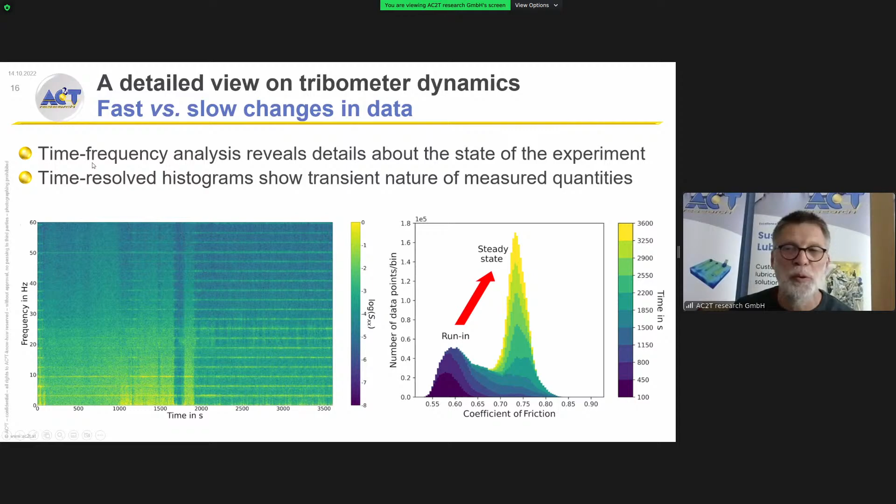Another important aspect is that you should actually evaluate the data on a cycle-based analysis. That means take one cycle after the other, look at what are the periodic features and what are the non-periodic features, and then you can reduce the error bars or the uncertainty of your data by a great amount. This will give you, for any later data analysis step, much more reliable and clean data.

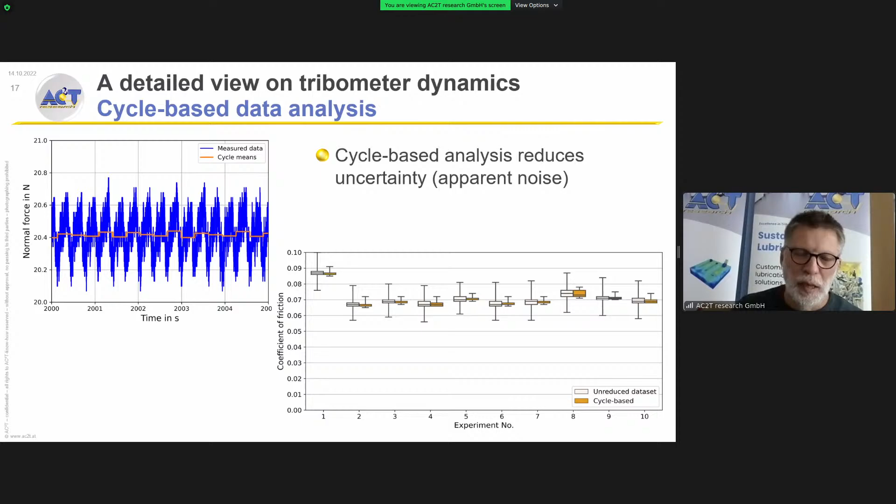Another very powerful tool which we developed in our company is what we call a 3D visualization of cycle data. Here, on one axis, you plot the in-cycle position. In our case, it's simply the rotation angle of the disk, but it may also be in a linear oscillating test rig.

This is, to my point of view, very useful in any kind of tribometrical experiment to get a clear idea of what's going on in the experiment, and then to pre-process your data for further analysis in a good way.

As promised, I give you the reference for this work. It was published in Friction in '21, and it's open access.

All right, so then let's continue with the next example. And this is now really about machine learning itself. Again, I would like to start with some motivating statement.

So what we have here is basically a laboratory setup in a linear oscillating tribometer, where we test a self-lubricating journal bearing, which I will show you later a picture of how that looks like, in an oscillating motion against the steel shaft. The idea is to mimic in this experiment the real-world behavior of this machine element.

Here are highlighted some of the operating conditions. What we have done is equip this machine with force sensors, with thermocouples, and with a microphone to get data for algorithms which would actually detect states of operation later on.

These experiments are carried out by setting a certain threshold on the maximum force which we can transmit, and when this force is reached, it is stopped. This is typically after 50,000 cycles, and we have 9 experiments.

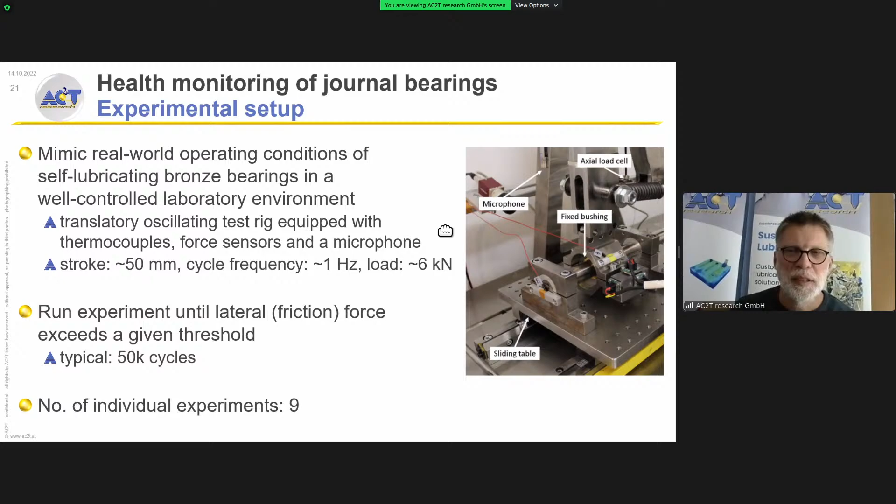Now the goal for machine learning is, what if we could train an algorithm which automatically detects these states and identifies critical operating regimes early enough so that we can take countermeasures, for example, to add some lubricant, or stop the experiment at an early stage.

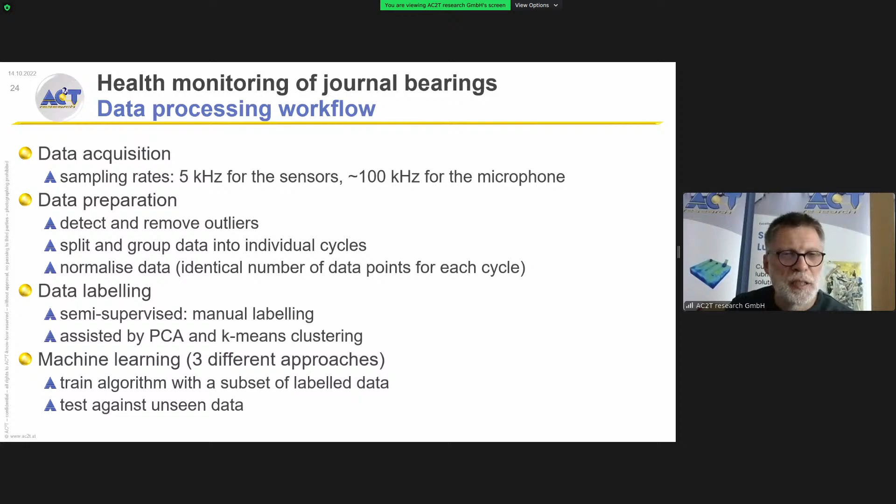These are the typical steps to go. I would not go into the details here, but just jump into the data labeling procedure. So, as I told you, we had 9 experiments, each consisting of about 50,000 cycles, and the goal was to label each individual cycle of each experiment. Of course, that is very tedious to do if you don't have any help for that.

Then we tried 3 different approaches to actually classify this data. The first approach—okay, I forgot to tell you, how did the manual labeling go?

We actually plotted the shape of the friction data over each other and checked where, at least from visual inspection, we can see differences, and then we would adjust the labels which were pre-given by the k-means clustering algorithm.

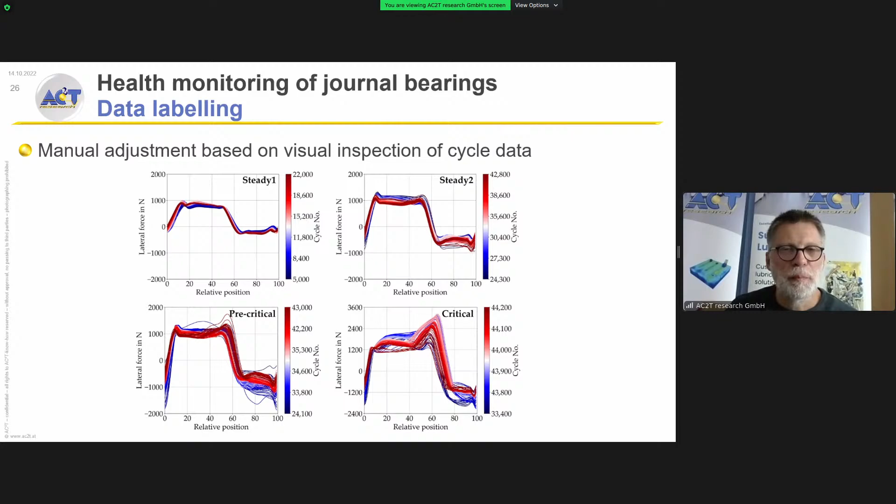So the first effort we made was using a random forest algorithm to train the data, to classify the experiments according to these 5 labels, or 5 classes, which we have given before. This is just a very short sketch of how we do that.

I think for all of you who did some machine learning, the procedure is probably the same everywhere. You take a data set from 4 experiments, split it into a training set and a test set, and train a random forest classifier. You make a cross validation against the test set and get a trained model from that.

The details are of course hidden more or less in the routines which we take. In this case, we take the scikit-learn library for Python to do that.

Then to check if the quality of the classification is satisfactory, we apply the trained algorithm to unseen data. That means from our 9 experiments, we've taken 4 to train the algorithm, and then we take another one to test the quality of the classification.

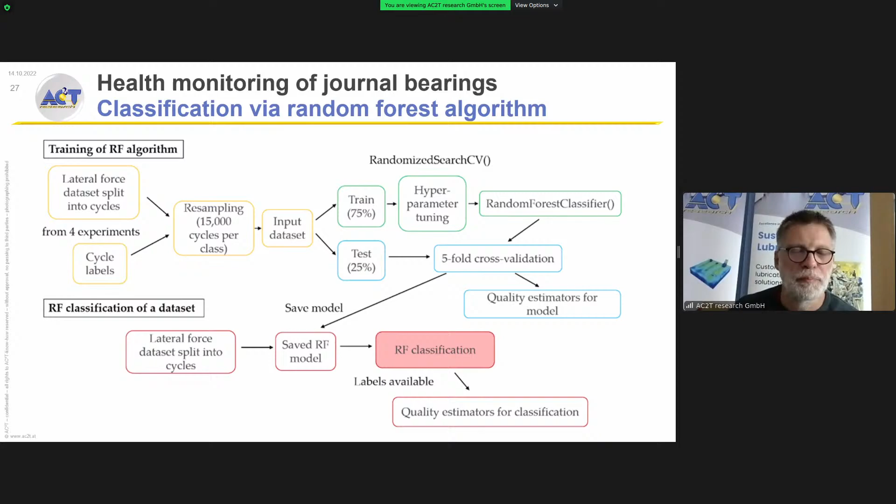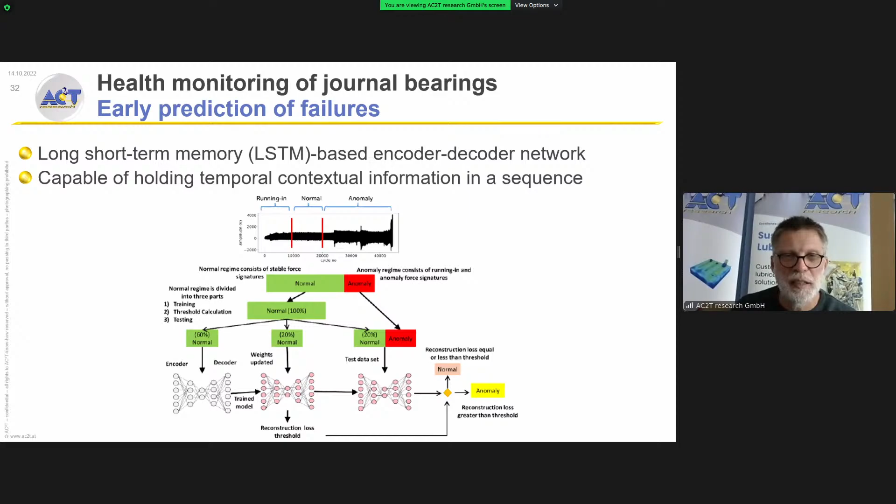Again we split the data into training and test data sets, basically the same procedure. What we could see is that about 5,000 cycles before the force signal would indicate abnormal behavior, this algorithm could already predict, by a largely increased reconstruction error, that something is going to happen. This, in my opinion, is the right tool if we would like to start investigating our system before it is damaged too much.

So again, we have 3 papers on that topic corresponding to these 3 steps I just told you. The first is about the random forest classifier. The second is about the microphone and the variational autoencoder. The third is about the long short-term memory encoder decoder. These are all open access, so you can access them if you want.

Now, since I'm running out of time, I go to the third example, which deals with engine oils. The methods here are more on the classical statistical side.

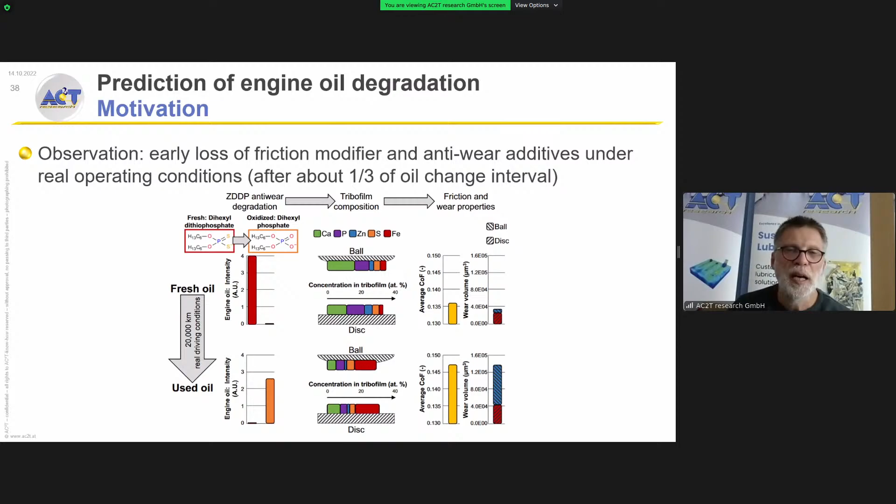You see that in the chemical composition, which we use to identify the state of the oil—I will come to that in a moment. But you also see it when you take this oil and do laboratory friction and wear tests: the coefficient of friction and also the wear rate increase when the oil is almost at the end of its life. Here are some example data from our friction and wear tests in-house, showing that the coefficient of friction rises and also the wear volume or wear rate rises.

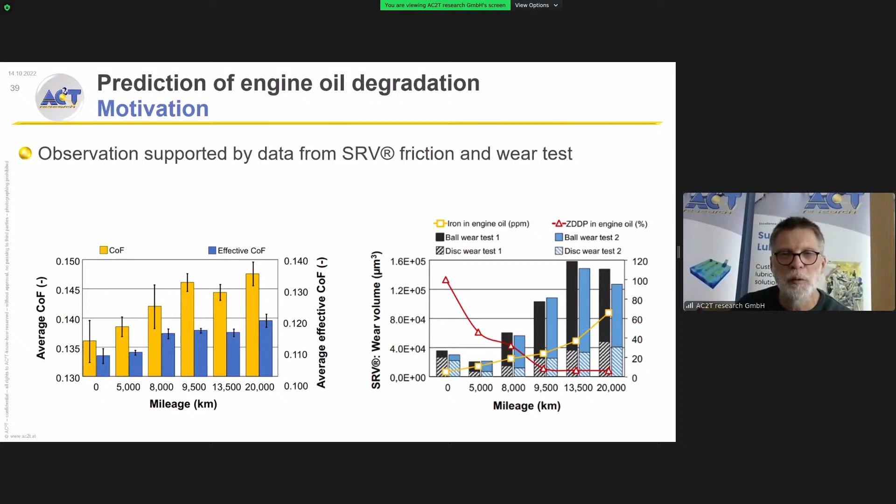This is the observation on a qualitative level, and the motivation is to devise some statistics or procedure where you can model this data and give more quantitative correlations between the different aging states of the oil.

One specialty we have in-house is that we have put up laboratory equipment where we could simulate this oil degradation under well-controlled laboratory conditions, what we call artificial alteration. And the question is always, are these artificial aged oils comparable to the natural degraded ones, meaning those actually destroyed in the car engine.

So we have a cooperation with Professor Filzmoser at the TU Wien, who is a well-known statistics expert, and with one of our joint PhD students we are dealing with this topic here.

We have oil samples from a passenger car, which were collected in an operating range of about 20,000 kilometers.

And then we have two different artificial aging setups. One is called small scale, which is just a laboratory device of this size, where you can probably age 1 liter of oil. And then we have a large scale reactor, which can operate a barrel of oil.

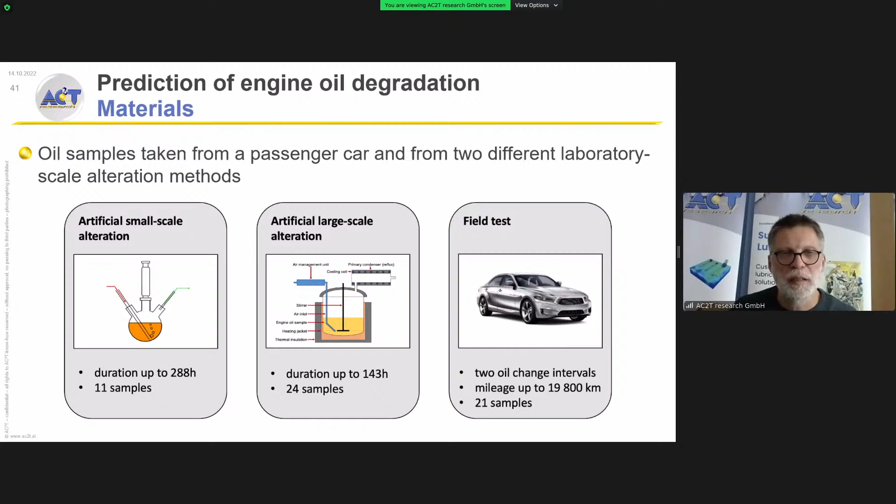The chemical information is obtained in this case using Fourier transform infrared spectroscopy, which measures absorption bands. This is a very well-known procedure for lubricant chemistry, and the experts in the chemistry department can actually assign certain products of the lubricant to certain bands in this spectrum.

And this information should be used to devise some quantitative correlation techniques.

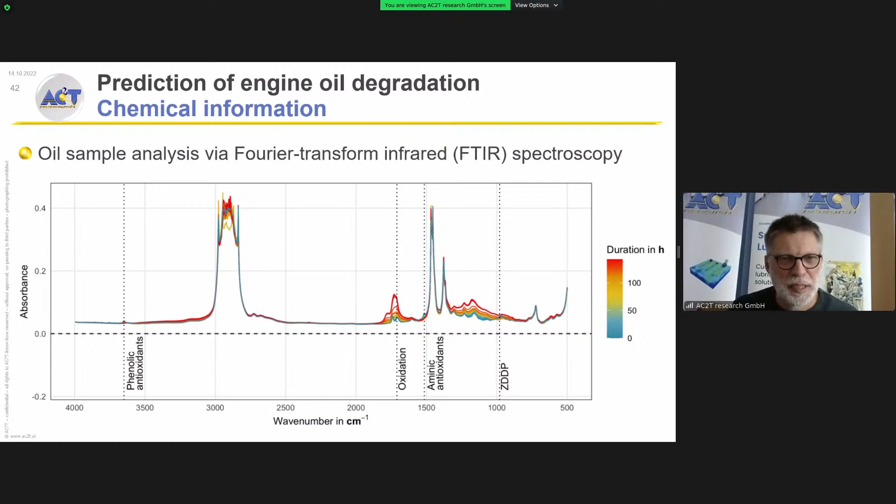So the first effort was to use more the exploratory aspect of statistics, namely the principal component analysis, to check where the biggest variation in the spectra might be.

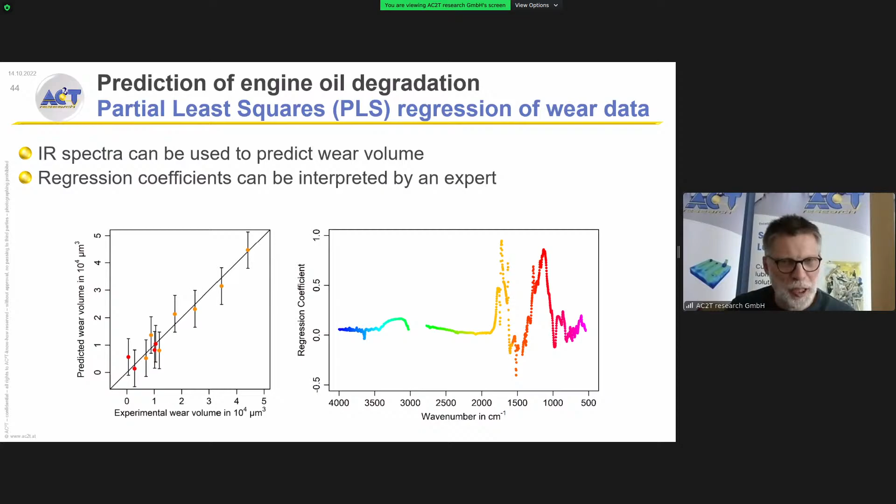What we also did is employ a partial least squares regression method to correlate our chemistry information with the wear and friction information which we got from the tribometers. Again, the interpretation is up to the expert what that means, but the correlation is not so bad, I would say.

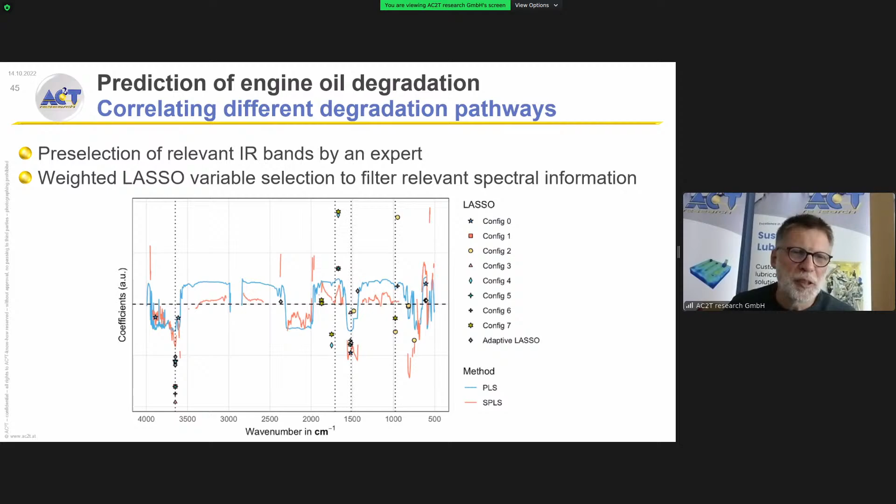And finally, we employed more modern statistics methods like lasso regression to actually correlate the mileage in the field to some duration in our reactor in the laboratory.

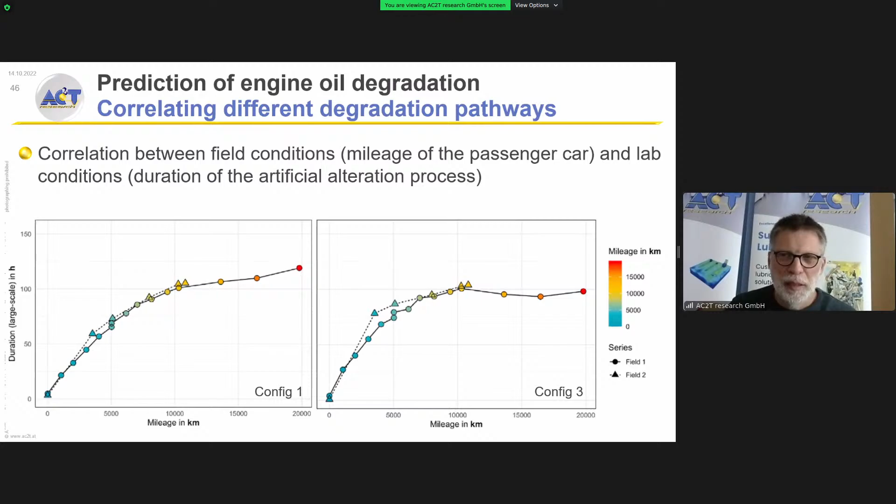Okay, so I will finally come to a summary and some conclusions. I would like to say that we have a few application examples here which demonstrate the various aspects of data science in our research, and AI and ML is only one of them.

All examples are real data, from experiments, and we always have domain expert knowledge as an important input in our examples. The findings which we publish or report here are limited to the specific system at hand, and we make no claims about transferability to other systems.

Finally, our data science activities are motivated by practical research questions, as you have seen, and we do not pursue data science as an end in itself. We are users of data science, but we have good partners who are really experts in the field, and they help us to keep up with or go beyond the state of the art in the methods we use.

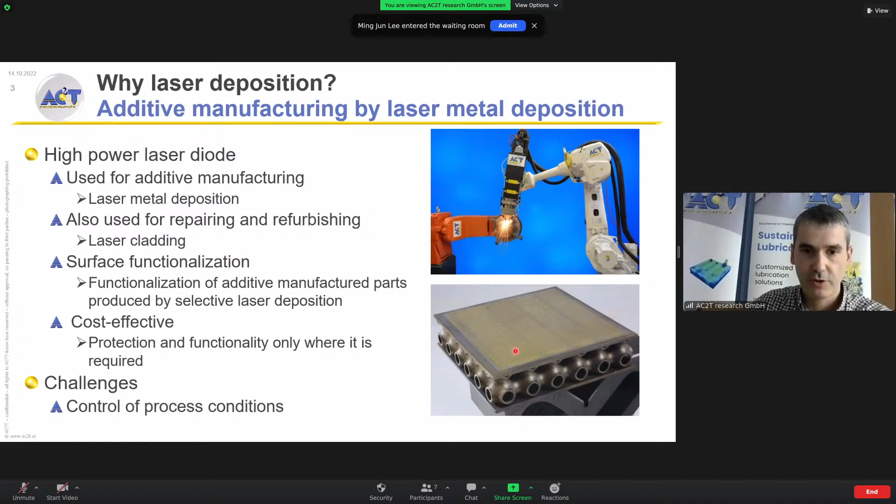But it also has some challenges in material deposition. The point is that, for example, if we have a nickel-based alloy and we want to make it self-lubricating, we need to add some solid lubricants. For example, silver is a soft metal with good shear, with low shear properties, but nickel and silver are not miscible. So if we melt them with a laser, we end up having a microstructure like this.

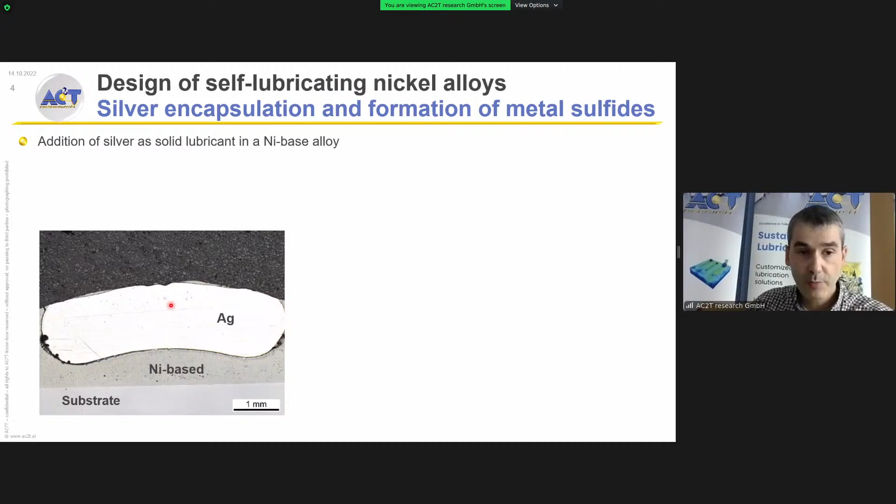So it's a substrate with a nickel-based coating with a huge silver bubble on top of it. This is completely useless, just a fancy way of wasting silver. If we want to have something useful, we need to have this solid lubricant homogeneously scattered and distributed in the microstructure. To do this, we need diffusion barriers for the silver.

We can do this using, for example, sulfide compounds. In our case, we use molybdenum disulfide that during the thermal deposition decomposes into chromium sulfide. This means the process is not limited to molybdenum disulfide; other sulfides can also be used as a precursor. Once we use these sulfur compounds, we end up having this microstructure with characteristic nickel dendrites, and silver, like these light gray silver inclusions that are surrounded by dark gray chromium sulfides.

So we check this nickel self-lubricating alloy under different conditions. The first one is reciprocating sliding model experiments against martensitic stainless steel. We always use some material as a reference; in this case we also use martensitic stainless steel cladding as a reference, shown as the red line. We can see here that when we use the martensitic stainless steel, friction is very high.

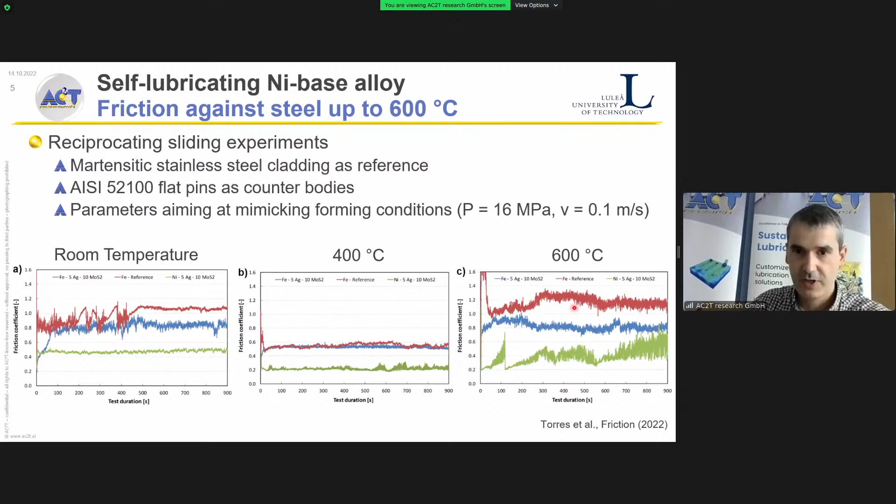And when we use, for example, the nickel-based alloy, the green lines, we are able to have a very steady and low friction. For example, look here at 400 degrees - we can have metal-to-metal contact at 400 degrees without any lubricant and a steady coefficient of friction of 0.2, compared to close to 0.6 for the martensitic stainless steel. So very good friction performance, and at 600 degrees it still manages good performance, much better than the reference alloy, though it already struggles a bit.

We also tried a close-to-reality tribometer available at Luleå University of Technology in Sweden. In this case, we have a strip test with aluminum silicon coated ultra high strength steel at 700 degrees, and we always do a single pass, replacing the sheet and using a new one each time.

You can see here the results: when we use the reference, in this case a nickel based material without any solid lubricant, friction is high, and we also have these break-ins into the aluminum silicon coating, with spikes of friction close to 1. When we use the self-lubricating one, shown in blue, we have much lower friction, around 0.3 for every sheet, and when we change the sheet we also don't have this break-in friction. We also get a change in the wear mechanism, switching from adhesive wear, which is very detrimental in forming processes, to mild abrasion.

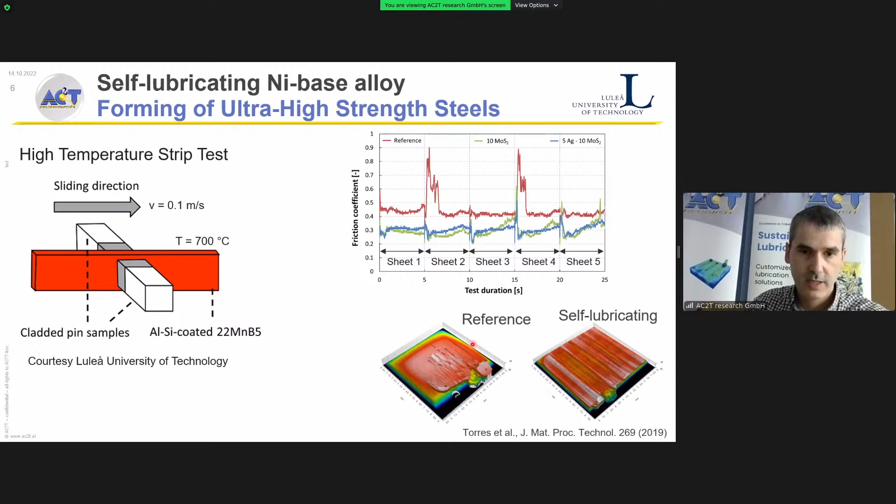Another example, also in this case, model experiments, reciprocating sliding against aluminum alloy. In this case, forming of aluminum is very demanding, so we added some solid lubricant and checked what happens when we have lubricant starvation.

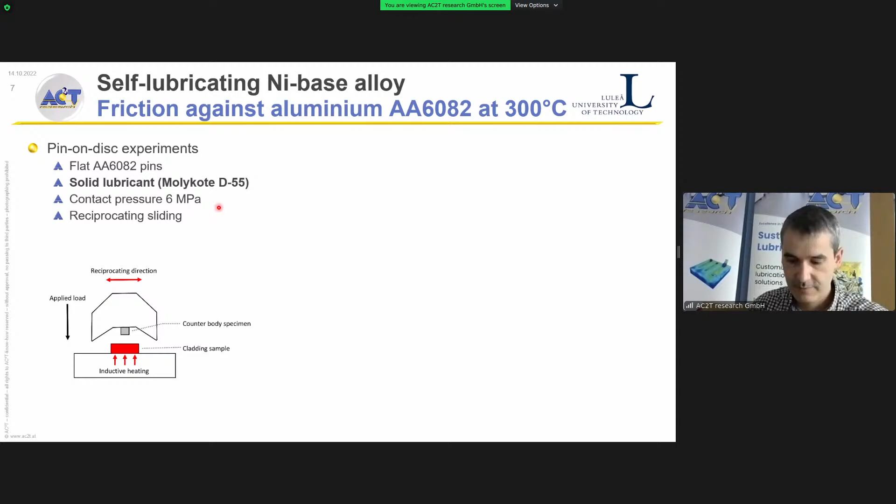You can see, for example, a tool steel starts here with very low friction, but as soon as the solid lubricant fails, friction skyrockets and goes over 2, and we need to stop the experiment due to extremely high friction.

With the nickel base, the blue line, we see that initially friction is low due to the solid lubricant, then you end up building a tribofilm, and at some point friction gets very stable with a value of 0.5 and could continue during a much longer period. Also in this case, we see that we switch from adhesive wear to mild abrasion.

But where these nickel-based materials really shine is in vacuum. So in vacuum, we tested against 440C martensitic stainless steel. This is the reference material for vacuum experiments. This is a pin on disc, but don't be confused, it's not unidirectional. It's reciprocating sliding, so we are moving around an arc of circumference with a constant normal load at 2 different temperatures, room temperature and 300 degrees, without any solid lubricant, without lubricant at all.

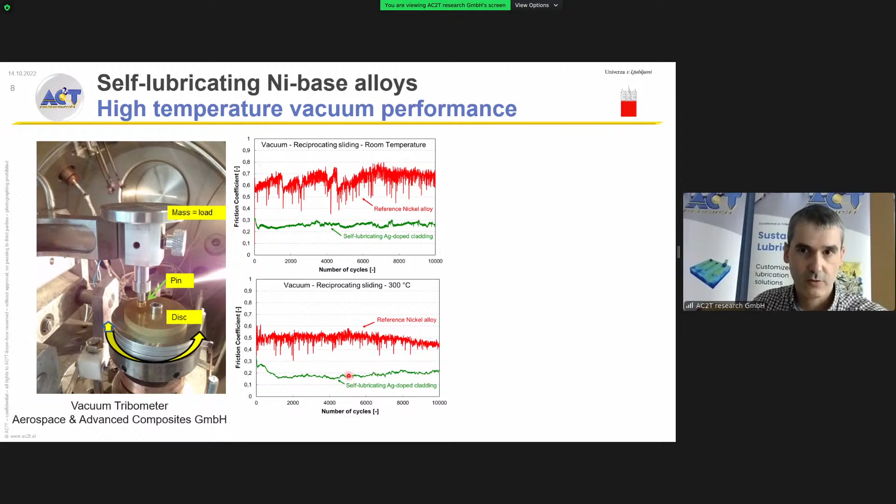So completely dry contact. What we can observe here is that the reference nickel alloy at room temperature or at 300 degrees has a really high coefficient of friction, very unsteady with these spikes characteristic of metal-to-metal adhesion. With the nickel-based self-lubricating material, friction is very low, around 0.25 at room temperature and slightly below 0.2 at 300 degrees. Again, this is metal-to-metal contact in vacuum at 300 degrees without any lubricant at all.

In this case, what we can observe is that not only is the friction much better, but also the wear is much better. For the reference nickel-based cladding, we have severe plastic deformation and an irregular wear track. With the self-lubricating nickel cladding, friction is very, very small, with a very homogeneous, narrow and thin wear scar. We can see in the scanning electron microscopy image how this smearing of silver, supported by thermal softening at 300 degrees, helps control friction at these temperatures.

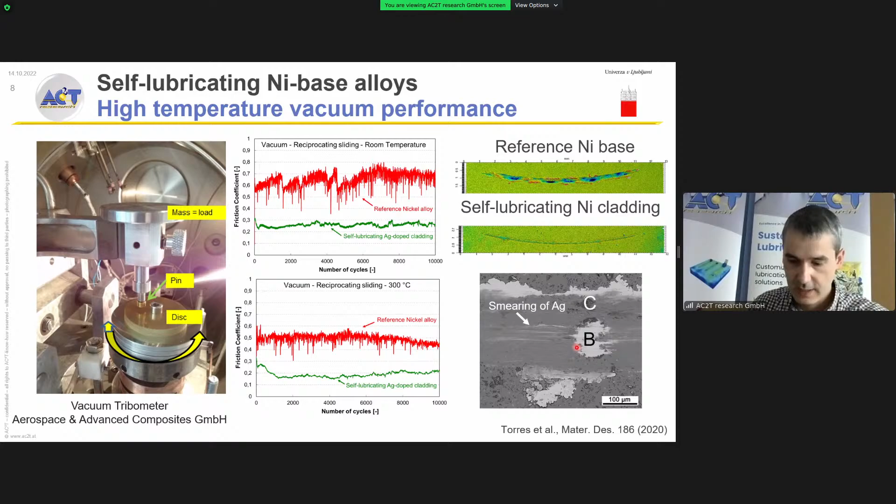Now I would like to leave the last 2 slides with a bit of outlook. So what are we doing right now? We thought, okay, having a nickel self-lubricating material is cool, but actually it would be much cooler to have a self-lubricating titanium alloy. Titanium is a superb material, with excellent strength to weight ratio and very good corrosion resistance, but really miserable tribological properties. The idea is, would it be possible to have a titanium alloy with some self-lubricating properties?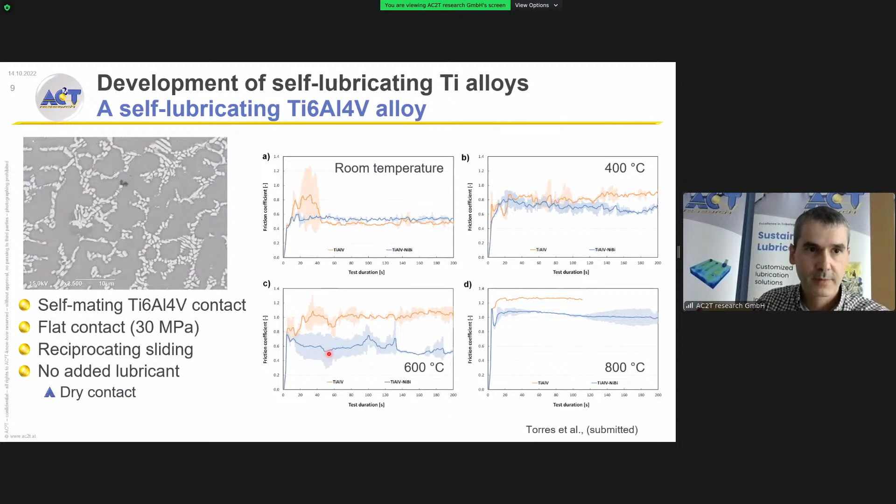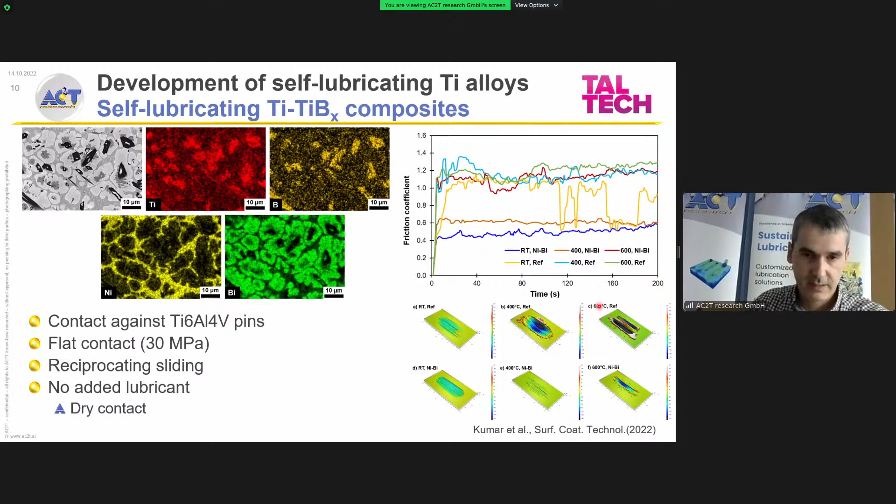Finally, we came to our colleagues from Tallinn. They are working on powder metallurgy, developing titanium boride composite materials, and we apply also this nickel-bismuth addition, ending up with this titanium boride titanium phase surrounded by bismuth, and this bismuth phase surrounded by nickel. We repeated these experiments under very detrimental conditions, self-mating titanium contact, and we see that especially at the lower temperatures, room temperature and 400 degrees, friction in a titanium self-mated contact can be as low and steady as 0.4. Not only does friction get better, but compared to the self-mating titanium contact, the wear becomes much better too.

So with this, I would like to conclude. I have shown you our initial self-lubricating nickel alloy that works by encapsulating metal sulfides on silver pockets, providing very good friction control in air until 600 degrees and 300 degrees in vacuum, friction reduction in different forming processes, and now our current work on self-lubricating titanium alloys.

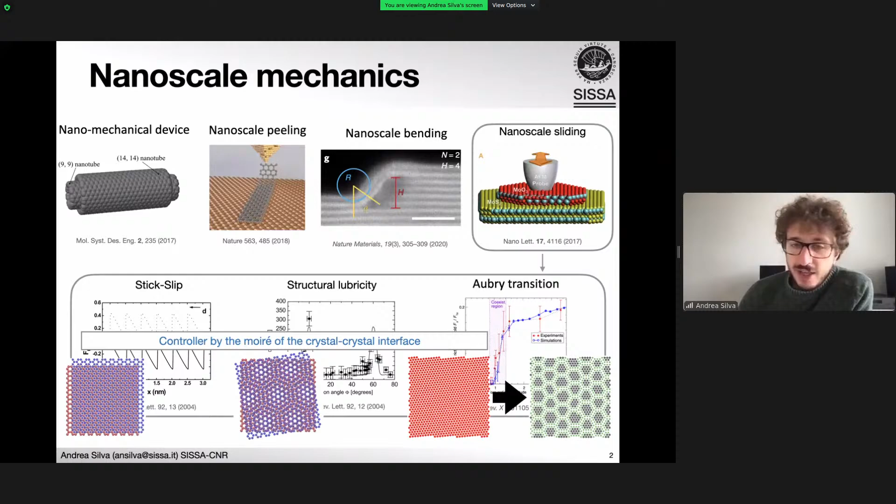The zoology and variety of these patterns for specific crystal interfaces is very big, as we saw in talks on Monday. It can be probed by high-throughput density functional studies, where you compute the potential energy surface of two crystalline interfaces sliding.

It has also been probed in experiments, for example gold island sliding, molybdenum disulfide island sliding on gold, where the system is always pushed in the same direction but moves along a preferential direction due to crystal symmetry. So there is directional locking of the motion.

At this small scale, the effect of finite size is also very important, as shown in 2013 by Dietzel. When studying friction as a function of size, friction scales according to specific rules, and in particular structural lubricity, where friction disappears in an infinite contact, displays sublinear scaling with the number of atoms.

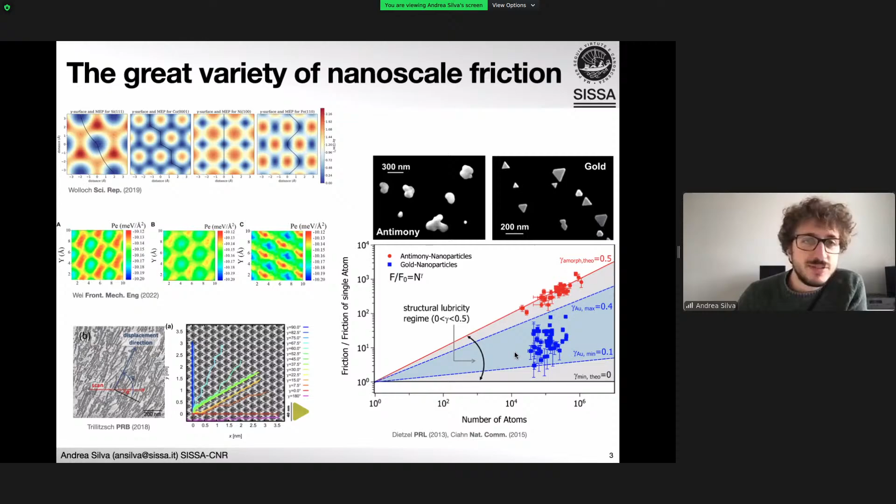So the realm of sliding friction at the nanoscale is complex, and even to explore it we need some guidance. That's what we tried to do recently: defining a degree of commensuration and trying to answer the question, given an arbitrary interface - meaning two mutually rotated lattices - what is the qualitative friction behavior to expect? Not going quantitative, like a step before high-throughput, but a general understanding of what friction to expect from a given contact.

So we work on a geometrical level to be general and fast. Now I will try to summarize a lot of math in a visual way. But first, let's build a system.

Our system is built from a substrate potential, which has a general form and is periodic with whatever periodicity we want. There is a reciprocal space associated to it - the Fourier transform of the real space.

We put above the substrate our adsorbate, building our crystalline interface. This is a second lattice with a different periodicity that can be rotated at an angle, associated with an adsorbate reciprocal lattice as well - the red point here.

The frictional quality of the contact at this nanoscale, at least in this theoretical extended world for now, is given by the appearance of a coincidence lattice vector, which is when the two lattices match so they can interlock nicely and give rise to high friction or structural lubricity.

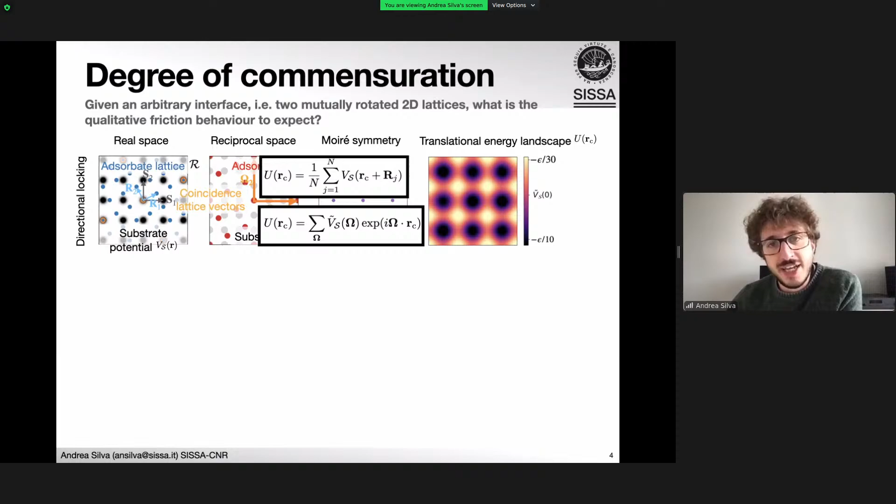So this is the case of directional locking, where friction is high and you expect stick slip. On the other hand, we would have structural lubricity, where the system can slide freely in any direction. So the energy landscape that we see here is flat.

This means that the two lattices are incommensurate, but there could still be, mathematically, a coincidence lattice vector in real space. But if there are none in the reciprocal one, then you would expect to see this sort of flat energy landscape.

In this categorization, we discover an intermediate novel type of interface, which we call directional superlubricity, because for specific lattice symmetries, you would have only one coincidence lattice vector, and the moiré pattern would form dense lines spaced over discrete spacing, which results in an energy landscape made of valleys and ridges, where the friction is exactly zero along the valley, but retains a finite value perpendicular to it.

Going back to the real world, the first case would be graphene sliding on graphene, where as you translate the upper layer, you go through different configurations with minima and maxima alternating. Another example with the same symmetry would be nickel on nickel.

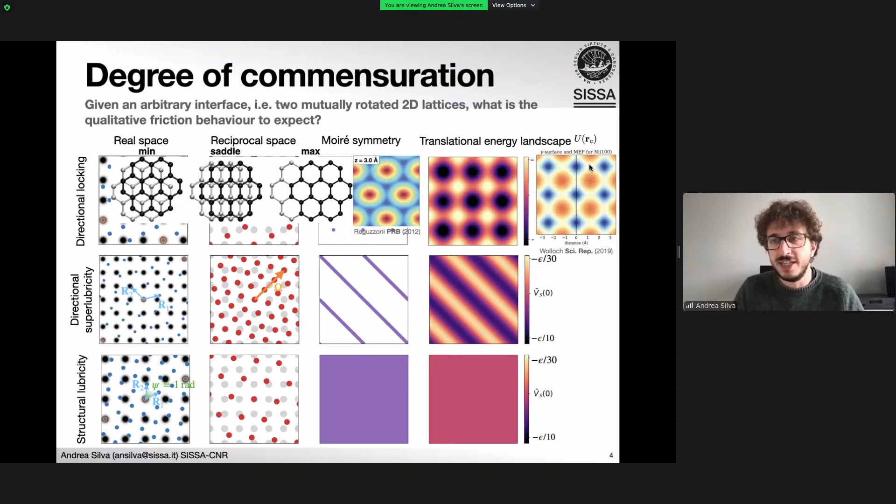The case of structural lubricity would be, for example, molybdenum disulfide sliding on graphite or hBN, because they have large incommensuration. And we are not aware of anyone reporting a theoretical study on this directional superlubricity with this specific friction anisotropy and the scaling law I'm about to show you.

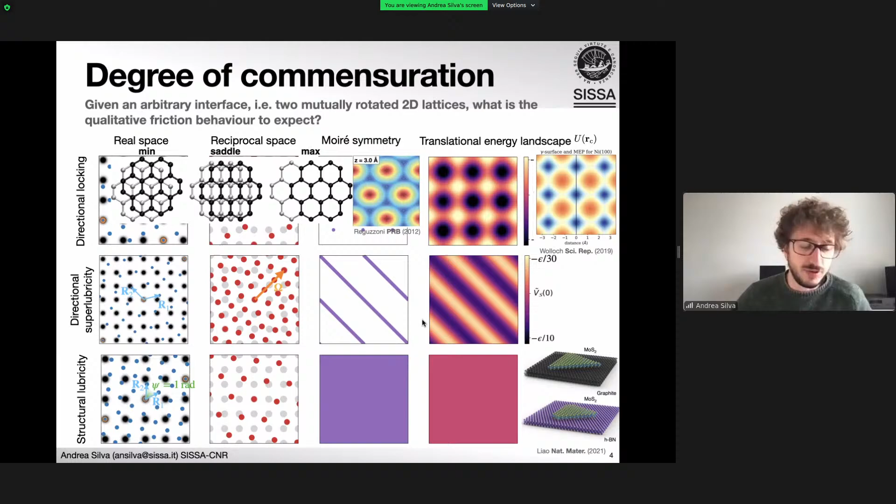As I said, the scaling law is kind of what defines structural lubricity, going from finite size, increasing the size, to a sublinear scaling. And we can describe that with this approach.

So if we take a finite flake of size n, we can write the potential energy surface in real space by summing over the particles, or using the reciprocal lattice depicted down here. So we can expand in the Fourier components.

This is for a finite size flake that will go back to the one I showed you before for an infinite system. There are a bit of formula here, but they can be broken down. The important bit is that here we have an arbitrary form of potential, which just needs to be periodic, and we can write the system equivalently in Fourier space.

The spatial distribution is given by these plane wave terms here, and at finite size, we have this weight. So all the Fourier components, which means any possible modulation of the corrugation, enter the system, but they are weighted by the specific shape and size of the flake.

In the infinite limit, this needs to give back the categorization I explained before, because this weight will just select the relevant Fourier component, which here are these matching vectors defining the moiré pattern of the system. At finite size, other components can contribute as well.

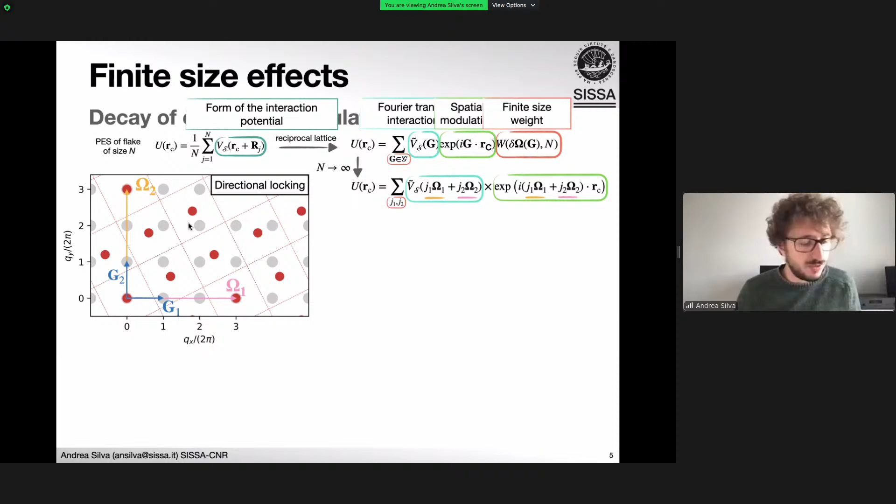So we have a superposition of different modulations. For example, we can check what happens to these other two substrate lattice vectors, these other modulations, and we can describe analytically how they decay towards the infinite limit.

We have a constant term here, which is the coincidence lattice vector, and a decay term, which won't be seen at infinite size but still very much affects the behavior at finite size.

This is all a bit confusing, I imagine, but I think it's very well visualized. If we take a small flake and drag it around the substrate, like here, we see that the energy landscape is very complex, with many different periodicities and modulations on it. As the size increases and the system realizes its true incommensuration, the other Fourier components decay, and we move towards the infinite limit of the interface.

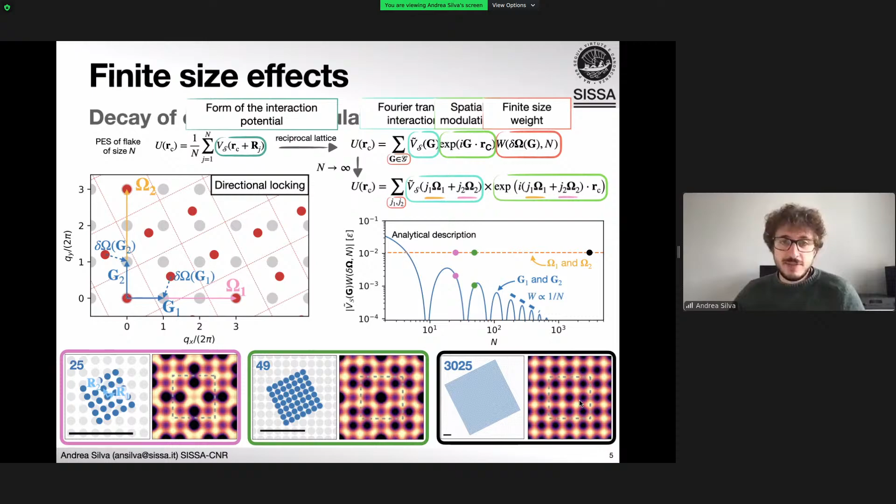Now we can go back to a bit more friction and measure the friction along the two directions, so if we go parallel to the valley or perpendicular to them. What we find is that the friction scales very differently: we have a finite friction per particle that's constant perpendicular to the valleys, while along the corridor, as the size increases, it scales sublinearly.

We tested numerically how this goes for different shapes, and we see that it nicely stays between the theoretical boundary, which has these two lines. So we're still very much in a theoretical world.

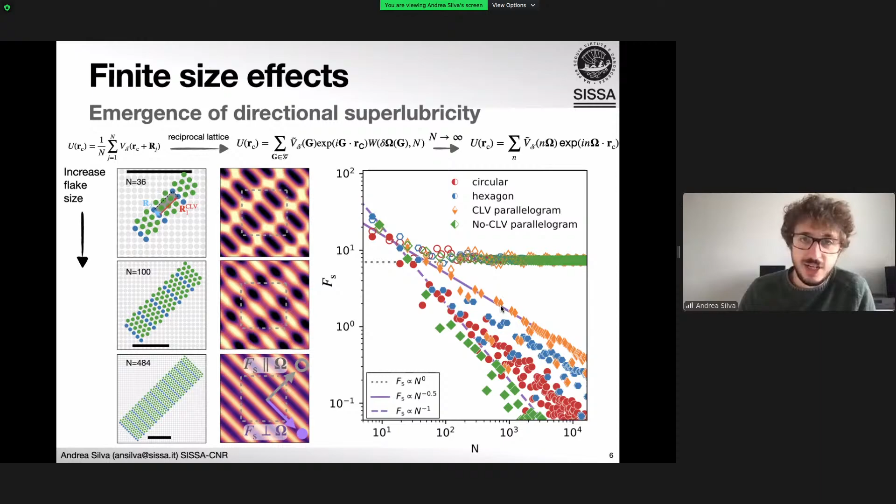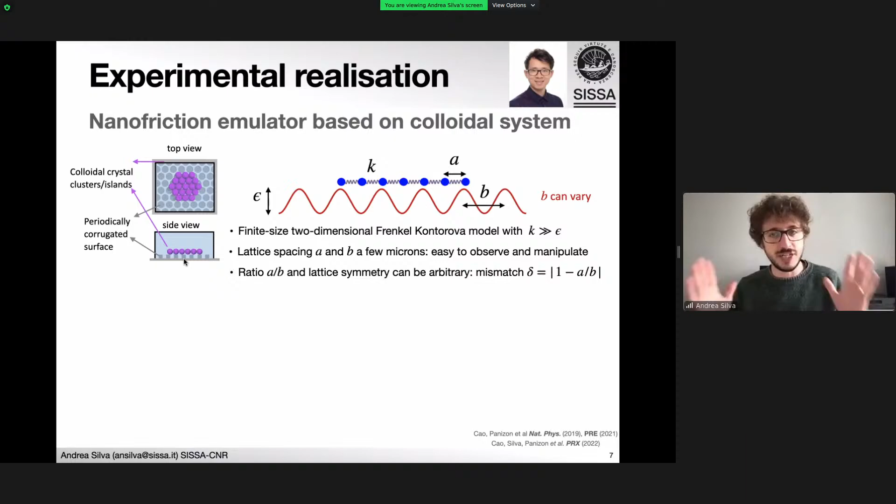I just wanted to give a couple of examples where we saw this in a more real system. Not quite a nanoscale interface, but what we call a nanofriction emulator, which is a colloidal system that emulates a real atomic interface, where we have these colloidal clusters over a pattern surface where we can tune the symmetry and strength of the substrate potential, mimicking two crystals basically meeting and pressed against each other.

We can drive it like in a friction experiment using gravity, and we can see that this cluster moves along the pattern surface along specific directions, showing some directional locking.

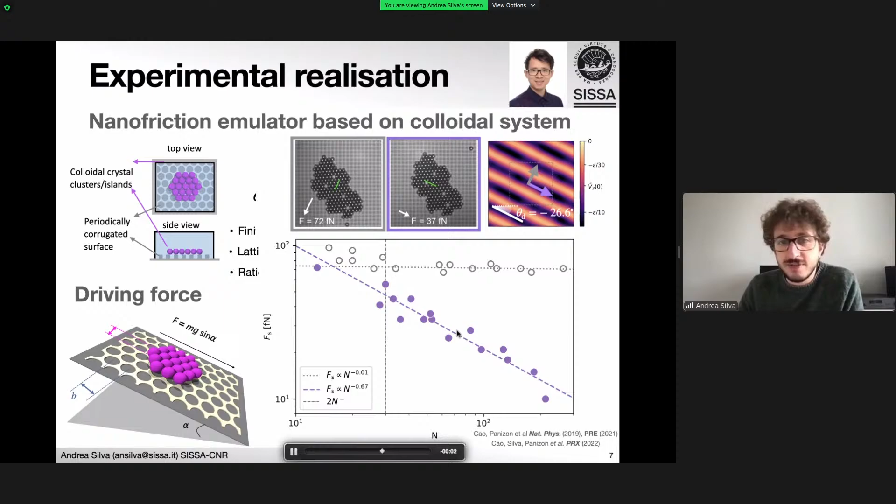If we probe the system along two directions, where we create a system that should exhibit directional superlubricity as predicted by the theoretical model, we see that the friction along the valley and perpendicular to it nicely falls in between the prediction of the theory. So we are constant when we go across the ridges, and it scales sublinearly with size as we go along the valley.

So one last thing we can do is reverse engineer this process and design an interface with an extreme friction anisotropy. In this case we took a graphene substrate and uniaxially strained it along X by about 1.8%, which is well within experimental values. Then we place an HBN flake on top of it.

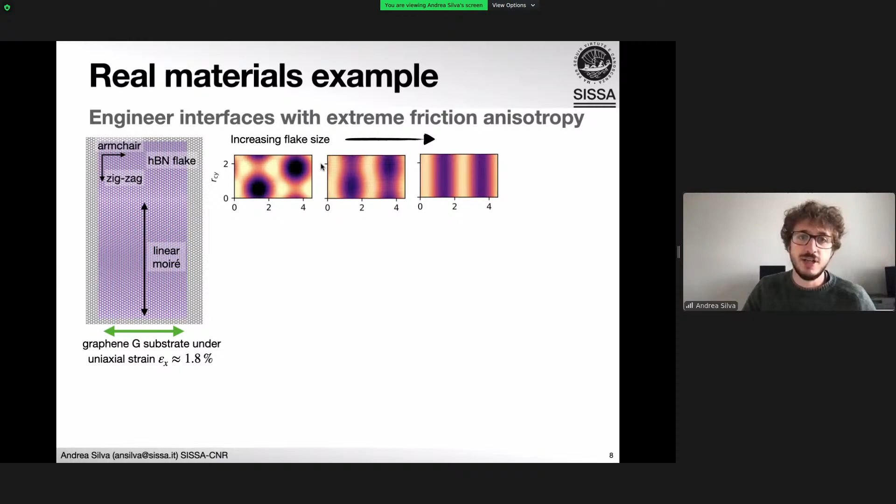We can see what happens as the size of the flake increases. The system goes from the usual hexagonal Moire pattern, and as the size grows, it develops this valley, up to the infinite limit system where you have perfect valleys in between them.

Then we can probe the friction sliding perpendicular to this valley or parallel to them, and we find a scaling of the friction in the two directions which is very much in agreement with what the theory expects. Of course the situation here is more complicated because we use realistic potentials, not some approximated Gaussian. So the system has constant friction perpendicular to the valley and goes down sublinearly in the other direction, realizing in the infinite system a very strong anisotropy and structural lubricity only along one specific direction.

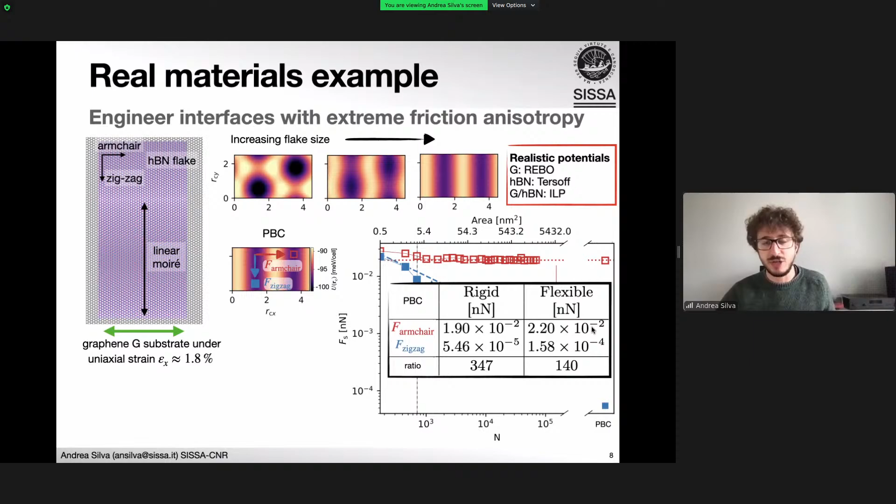And with this, I just want to thank all the collaborators, and any questions we'll take after.

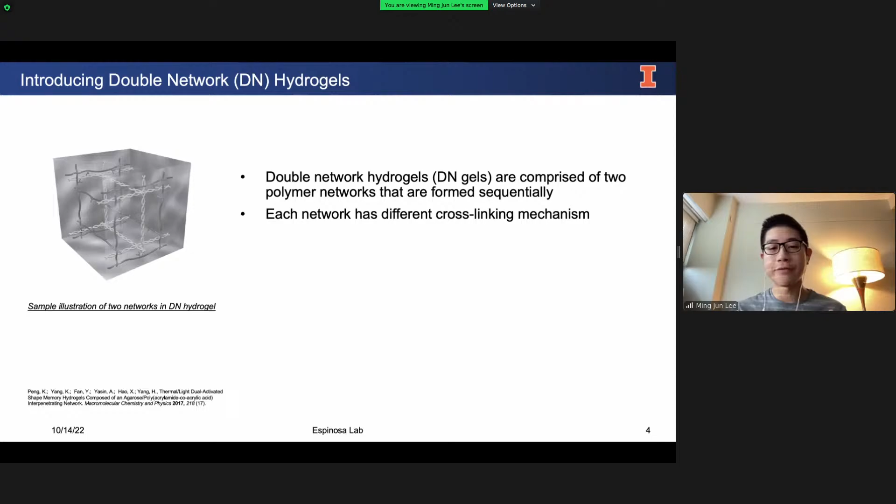That's where double network hydrogels come in. Double network hydrogels are comprised of two polymer networks that are formed sequentially, one before the other, and they commonly have different cross-linking mechanisms between the first and second network.

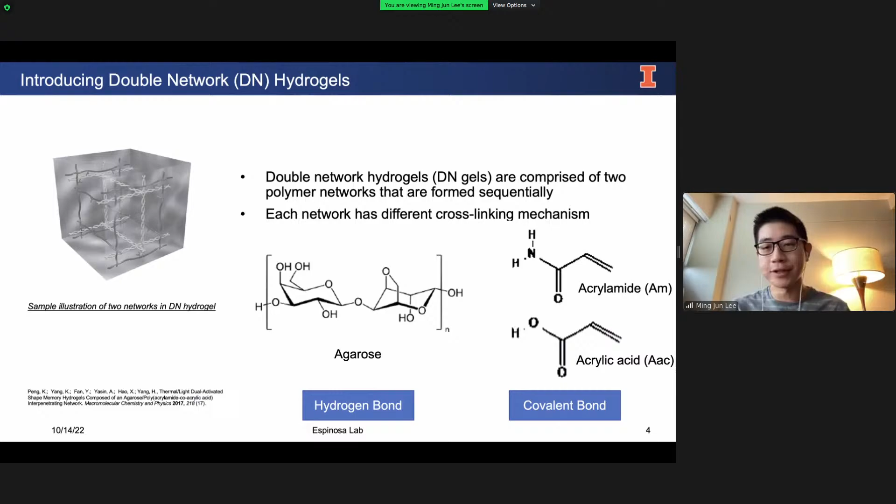My particular system comprises agarose as the first network, and then a copolymer between acrylamide and acrylic acid as the second network. Agarose has a physical interaction - it gelates through hydrogen bonding, whereas the copolymer gelates through covalent bonds. By controlling these two different interactions, I can time their sequential synthesis to make a double network hydrogel.

Double network hydrogels can address one of the problems I mentioned earlier, where hydrogels need to be strong enough to sustain our body weight.

Here I'm showing three different diagrams from three different papers explaining the mechanisms of energy dissipation in the double network hydrogel microstructure. What I want to highlight is that all these mechanisms have one thing in common, and that is the entanglement between first and second networks.

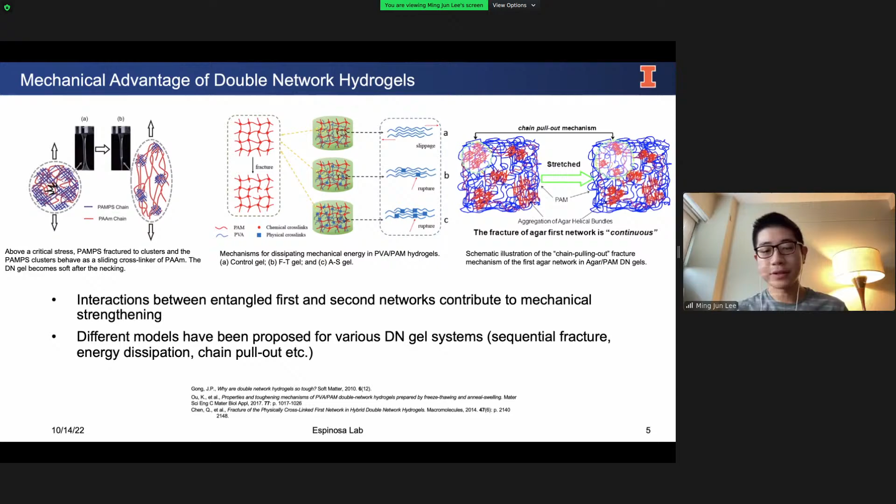If we imagine a fishing net, where the horizontal strings are the first network and the vertical strings are the second network, this kind of entanglement between the two networks naturally leads to an enhancement in mechanical properties. Different models have been proposed, but they all have this one thing in common. That's why I think this is the reason double network hydrogels are suitable for synthetic replacements, at least in the mechanical space.

Next, I would like to start talking about surface characterization, the adhesion and friction properties.

To begin, I'd like to show you this diagram of AFM, or atomic force microscopy. The way this works is that there is a small and sharp cantilever with a very sharp tip that touches the hydrogel, and a laser from above shines onto this cantilever and reflects into a sensor, a photodetector. As this cantilever travels along the hydrogel surface, the laser spot keeps moving, and that gives us our signal.

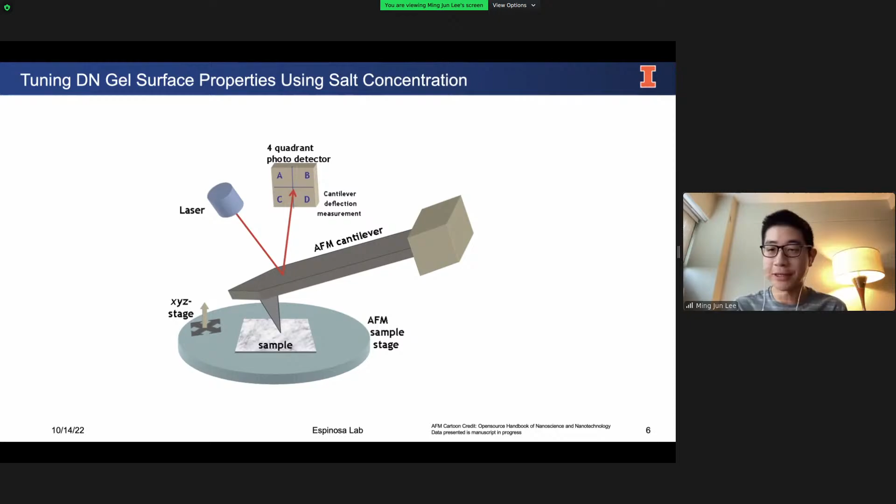In the following slides, I'll be showing you quantitative imaging, or QI images. This is a special mode from JPK that allows me to extract three data channels simultaneously: the height, stiffness, and adhesion of my hydrogel surfaces.

I'd like to direct your attention to the first diagram on the top, the upper left. We see a very unique microstructure for my double network hydrogel. It looks sort of like a grain structure, or even like bubble wrap that we have in our shipping containers. The elevated orange grains, I believe, are the copolymer component - the acrylamide-co-acrylic acid component - whereas the black areas that are lower in height, the valleys, I believe are the agarose network.

One reason why I believe this structure appears is that if you look in the second image, the stiffness channel, the valley regions correspond to a higher level of stiffness. Through common knowledge in the hydrogel space, we know that agarose is the more brittle and stiffer network compared to the copolymer. So this is why I believe there are heterogeneities in the surface structure - the elevated sides are the copolymer, whereas the lower height is the agarose network.

Now I'd like to show you, moving from left to right, this one same hydrogel being equilibrated in different concentrations of potassium chloride salt solution. What I'm seeing, a trend that appears, is that when the salt solution gets more concentrated, the height is actually decreasing. The gel is collapsing.

I think that this is due to osmotic pressure differences. When the concentration is changing, water diffuses out of the hydrogel, leading to a volume collapse, the volume going smaller.

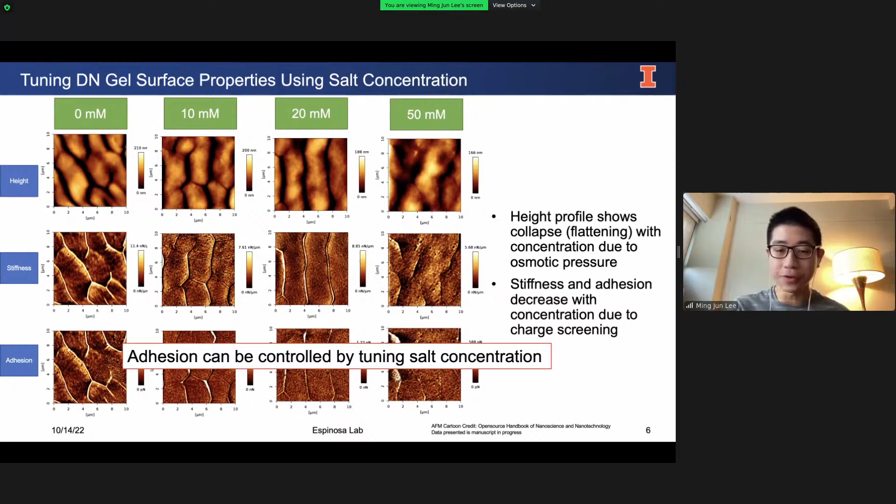Importantly, what I want to show you with this series of AFM images is that adhesion of hydrogels can actually be controlled if we tune the salt concentration that we immerse them in.

Now I'd like to talk about the charge screening effects. The first figure I'm showing is the swelling ratio against potassium chloride salt concentration.

Swelling ratio is the weight of a wet hydrogel divided by its dry weight when all the water has been removed. This tells us how much the hydrogel is swollen in terms of volume. For the hydrogels, I have 3 different recipes, the 6,4, 7,3, and 8,2. These are just the molar ratios of the copolymer.

In general, as the salt concentration increases, the swelling ratio of all these hydrogels decreases, but it's getting smaller. At the same time, the zeta potential, a measure of the surface charge of my hydrogels, is also getting stronger and more negative as the salt concentration increases.

So what's happening? I believe that the carboxylic acid groups in the acrylic acid component are being partially screened by the mobile potassium ions in the salt solution, which decreases the apparent overall intrinsic charge of the hydrogel. With this difference in osmotic pressure, water would diffuse out of the hydrogel, leading to a smaller volume, so the swelling of my hydrogels decreases.

But wait, I just said the charges are being screened by the mobile ions. So why is the zeta potential getting stronger and more negative? This doesn't make sense. I think what's happening is there are competing effects between these phenomena. As the volume of the hydrogel decreases, the charge per unit volume, and therefore the charge per unit surface area, is increasing. So the charge density is increasing, and that outweighs the partial screening of the acrylic acid, leading to the stronger zeta potentials that we see here.

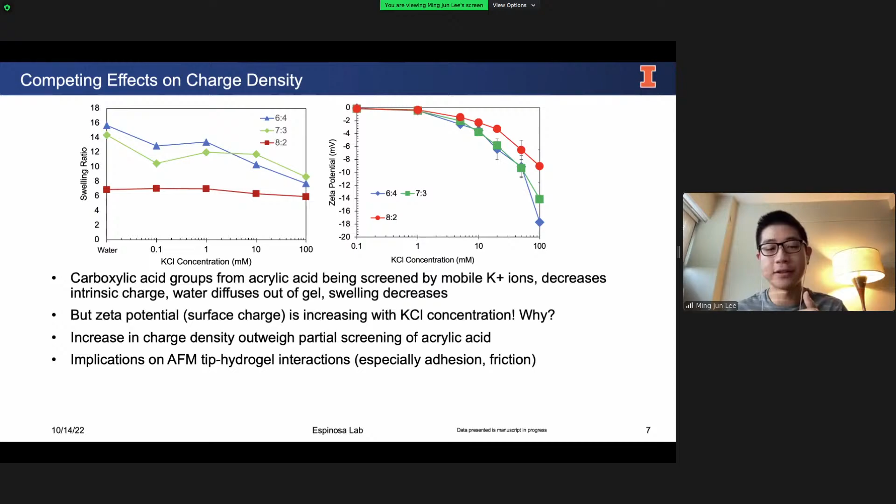Now I'd like to move on to the friction experiments using different concentrations of salt solution. On the first row is the height channel of the quantitative imaging images that I showed earlier. From the second and third row onwards, these are friction maps, a direct visualization of the friction force on the surface of the hydrogels.

First experiment I'll show is the applied load experiment, where I fixed the sliding velocity of the AFM tip to 10 microns per second, and applied different forces onto the hydrogel, starting as small as 2 nanonewtons in the middle row, followed by 5 nanonewtons, then some intermediate values, and finally ending at 40 and 50 nanonewtons.

For convenience, I've summarized the friction force values into histograms. We have the water condition in the first column, corresponding to the first row histogram, and the salt solution condition in the second column of AFM images, corresponding to the second row of histograms. What I'm seeing is that the friction force increases with the applied load. This is as expected and happens in both soft and hard materials.

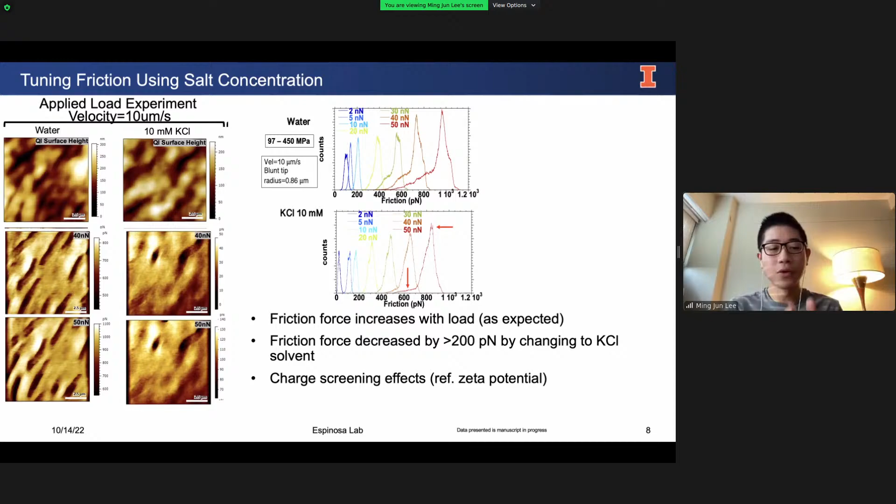But what's interesting is that the friction force on the hydrogels decreased by at least 200 piconewtons just by changing to the salt solution condition. This ties back to the charge screening effects mentioned earlier, because the surface of these hydrogels has acrylic acid groups, carboxylic acid, COO minus, negative terminated. The AFM tip is made of silicon and terminated with silanol groups, SiO minus. So having negative charges on both the AFM tip and hydrogel surface leads to repulsion between these measurement devices, which lowers the friction force measured by the AFM.

Next, I reversed the parameters into the sliding velocity experiment. Now I fixed the applied load to 10 nanonewtons, but changed the sliding velocity of the AFM tip, starting as slow as 5 microns per second, increasing to 10 microns per second, with some intermediate speeds, and finally ending off with 200 and 500 microns per second.

Once again, I've summarized the histogram values in the same positioning. What I'm seeing is that friction force generally increases with velocity.

And I believe this is due to just viscous dissipation to the solvent. The faster you slide, the more energy you lose to the solvent. And it's a feature of hydrodynamic lubrication.

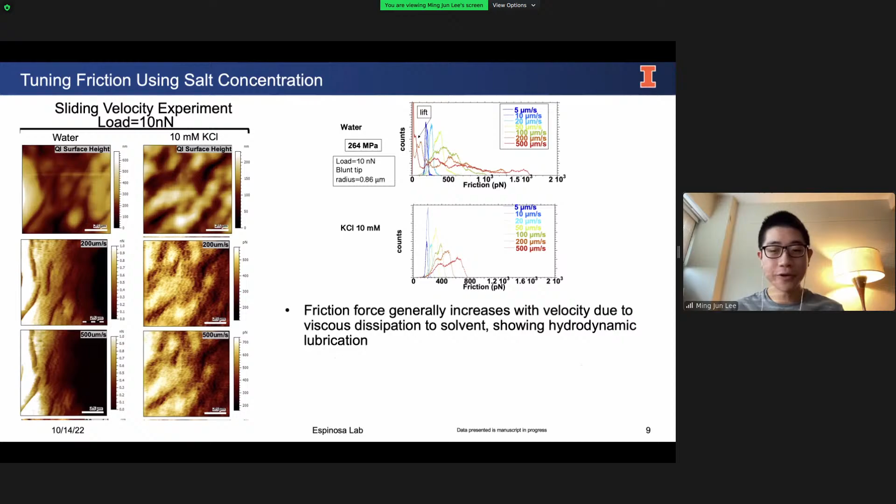What's more interesting is that I'm seeing two friction regimes that are coming out from my friction maps. In this arrow here, I like to highlight that you can see there are two peaks in the histograms, so two friction regimes.

I like to tie this back to the heterogeneous surface structure I showed you in the initial QI images. I had elevated grains that I believe are the copolymer, and then valleys that I believe are the agarose. So I think that the copolymer is giving me one range of friction values, and then the agarose is giving me a different range of friction values.

This could have potential applications in microfluidics, where you might want channels with higher adhesion and higher friction versus lower friction.

To summarize this slide, I'd like to have convinced you that we can decrease friction on these hydrogels by increasing the salt concentration that we immerse them in. As a side effect, we are also enhancing the heterogeneities of these double network hydrogels.

To conclude my presentation, I want to bring across and remind you of two key components. The first is that this particular system, agarose-poly acrylamide-co acrylic acid, has a heterogeneous surface structure with two distinct phases of properties. Secondly, the adhesion and friction of hydrogels can be adjusted. We can control them by changing the concentration of the salt solution that we immerse them in over time.

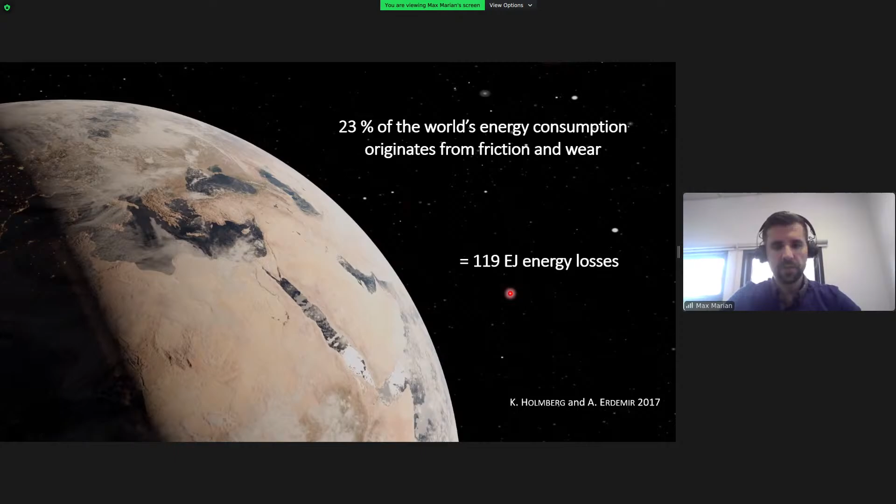But maybe this one might help out. So 1 exajoule corresponds to the energy of an asteroid the size of the Egyptian Cheops pyramid hitting Earth at 20 kilometers per second. So we are losing this kind of energy 119 times a year, only due to friction and wear in tribological contacts. Now, for me, this sounds quite a lot, doesn't it?

However, by really understanding tribotechnical systems and developing new concepts, new materials, new lubricants, or surface technologies, we might substantially reduce friction and wear in various applications and vehicles and machinery and any other equipment.

As stated, this covers manifold applications such as brakes or brake pads, clutches, the piston cylinder liner contact, thrust and journal bearings or gears, the cam follower, roller and ball bearings, or also load bearing implants. Within all these applications, we can break down the essential contact types or geometries into parallel and conformal contacts on one hand, and concentrated contacts on the other, which we can further distinguish into line contacts and point or elliptical contacts.

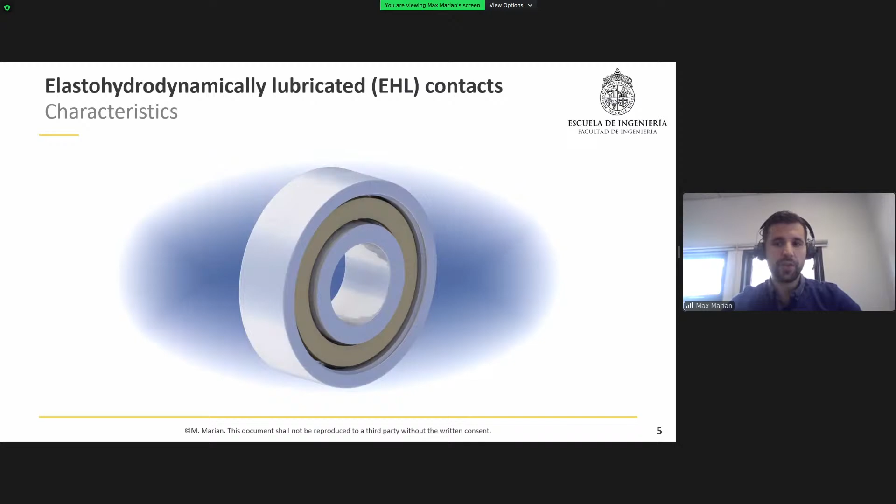In more heavily loaded contacts, where pressures can reach up to 4 gigapascals—roughly corresponding to the load of 7 African elephants standing on the area of a human thumbnail—as we have, for example, in rolling bearings, there's some elastic deformation of the contacting partners that adheres to concentrated contact geometry. This can generally be described by Hertzian theory and Hertzian pressure.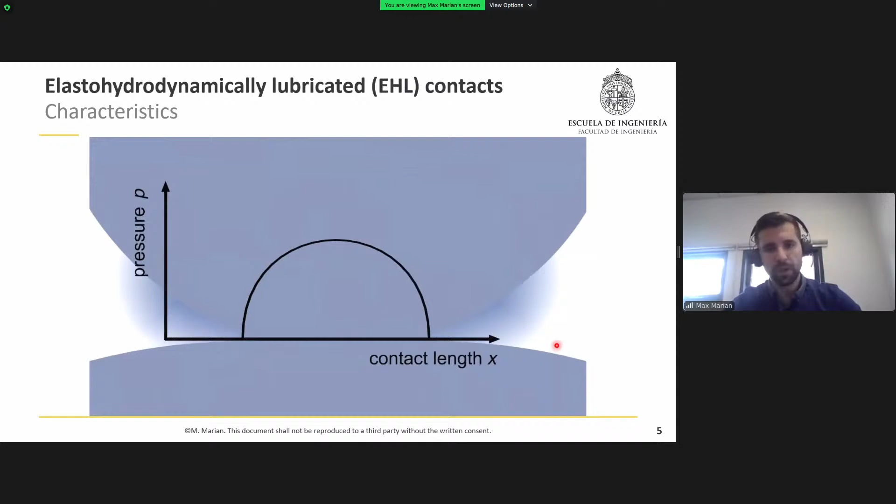Due to the lubricant, there's also a superimposed formation of hydrodynamic pressure. In the contact inlet area, compared to the Hertzian pressure distribution, we generally get an earlier pressure increase, which occurs due to lubricant compression. In the central part of the contacting bodies, we have an almost parallel film height, and there's an additional constriction in the outlet region, also accompanied by an additional hydrodynamic pressure peak. Typically, the lubricant film thickness and the elastic deformation are of similar order of magnitude for elastohydrodynamic, or EHL, contacts.

The elastic deformation and fluid film formation also depend on the stress collective acting on the contact. The resulting pressure and fluid film distribution is determined by the geometries of the contacting bodies with radius r, for which we can calculate an equivalent radius, and by the mechanical or material behavior of the contacting bodies, namely the elastic modulus E and the Poisson's ratio nu, for which we can calculate an equivalent elastic modulus.

Further, the kinematics influence the contact behavior, namely the velocities of the contacting partners, for which we can calculate characteristic properties like the hydrodynamically effective velocity um and the slide-to-roll ratio SRR. Finally, as relevant lubricant properties, we have the density rho and the viscosity eta of the fluid that determine the contact behavior.

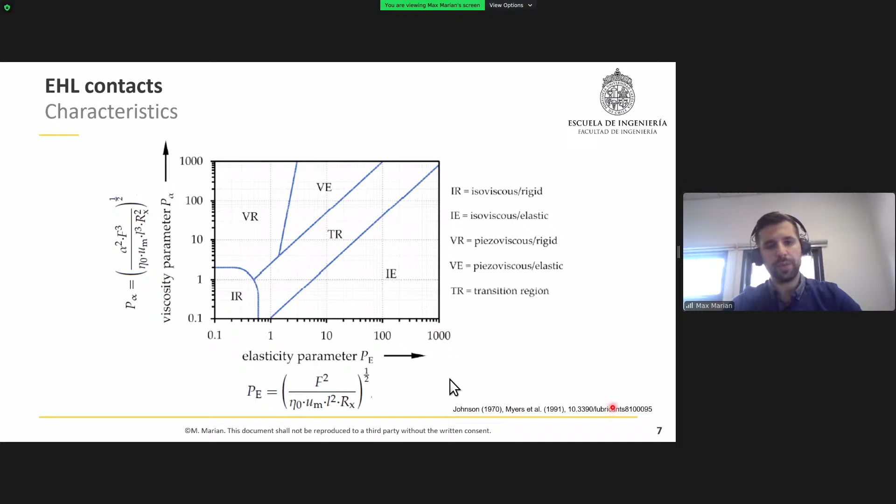So what I want to present in the following: I will briefly introduce the conventional ways to numerically model EHL contacts, and introduce two analytically solvable approximation equations. The main part will then focus on our attempt to use machine learning approaches to predict EHL film thickness, done in close international cooperation with the University of Erlangen in Germany, the Universidade de São Paulo, and the Universidad de Chile. Finally, I will briefly summarize my talk with our key findings.

So let's start with the simulation of EHL contacts. Generally, this involves various physical domains ranging from the lubricant hydrodynamics, as we have seen, contact mechanics, i.e. the elastic deformation. Potentially, there's thermodynamics and fluid rheology involved.

If we neglect non-Newtonian and thermal effects, as well as mixed lubrication, which I won't focus on in this presentation, we require both solution of the hydrodynamics and the elastic deformation. If flow and structural mechanics interact with each other, this is generally referred to as fluid structure interaction.

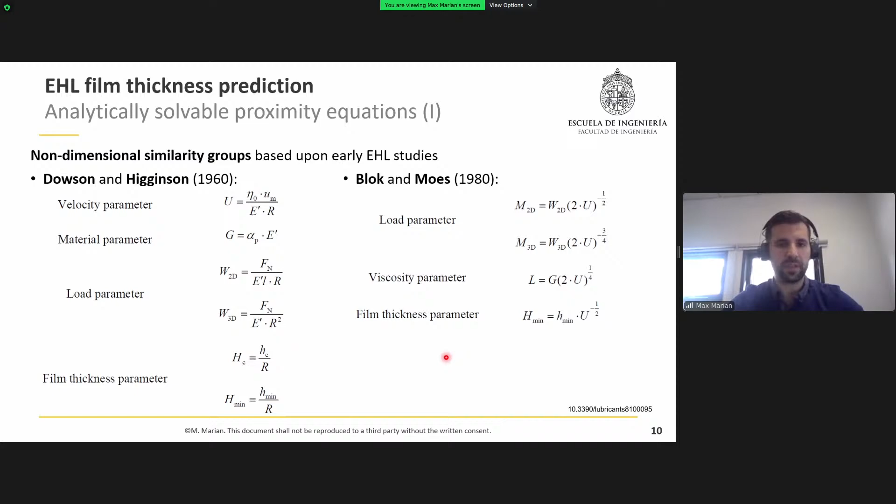To estimate, for example, the minimum film thickness in an EHL infinite 2D line contact, Dowson and Higginson proposed an analytically solvable regression equation as a function of the material, velocity, and load parameters. Based upon more advanced isothermal EHL simulations, these parameters have been modified and extended by various authors to also cover 3D point contacts and allow the determination of the central film thickness.

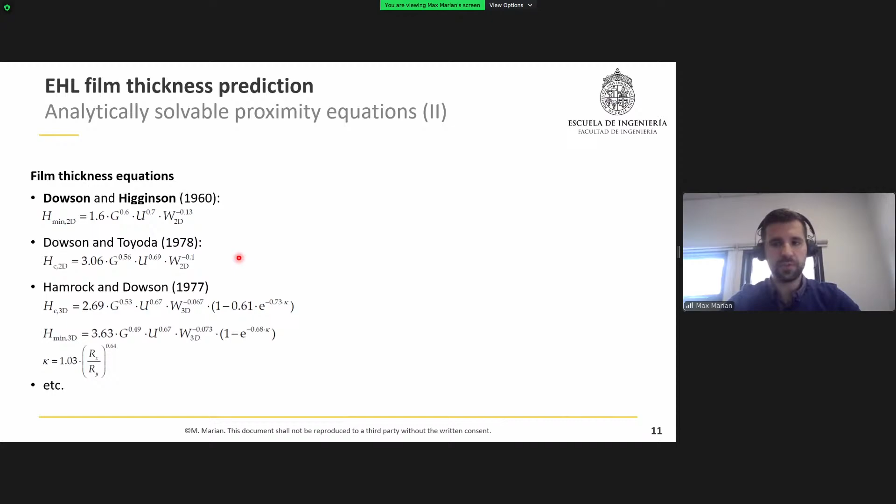There have been several variants developed and published over the years, mostly to cover a wider range. When we compare, for example, the equations suggested by Nijenbanning in comparison to Hamrock and Dowson, which have been derived for data in this kind of range, mostly they have been developed to cover wider ranges than the initial equations, and also to be valid, for example, in the more isoviscous and/or the rigid regimes. For describing these non-dimensional groups and parameters, the film thickness equations

can deliver quite reasonable agreement with many lubricants, which was experimentally verified by various authors, for example by interferometric film thickness measurements. However, there could be some deviations under certain conditions due to fluid compressibility, thermal effects, shear thinning, starvation, or surface roughness. All these aspects have not been fully considered in the original numerical solutions based upon which these kind of approximation equations were derived.

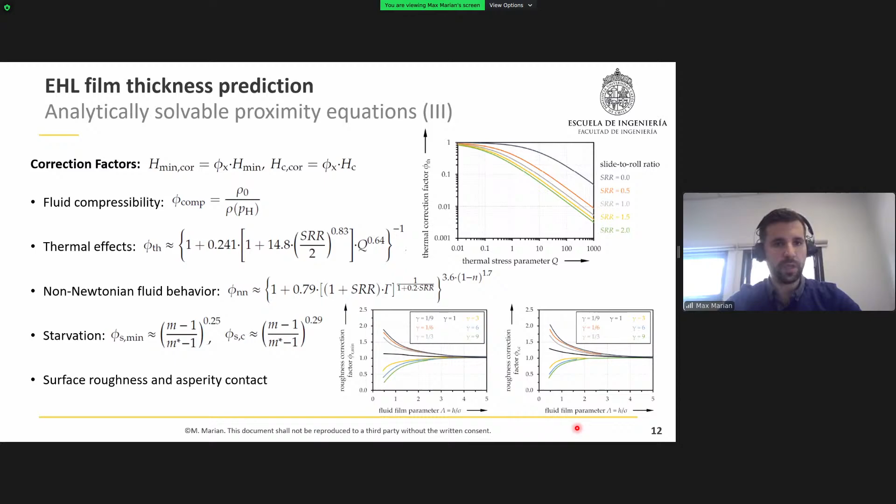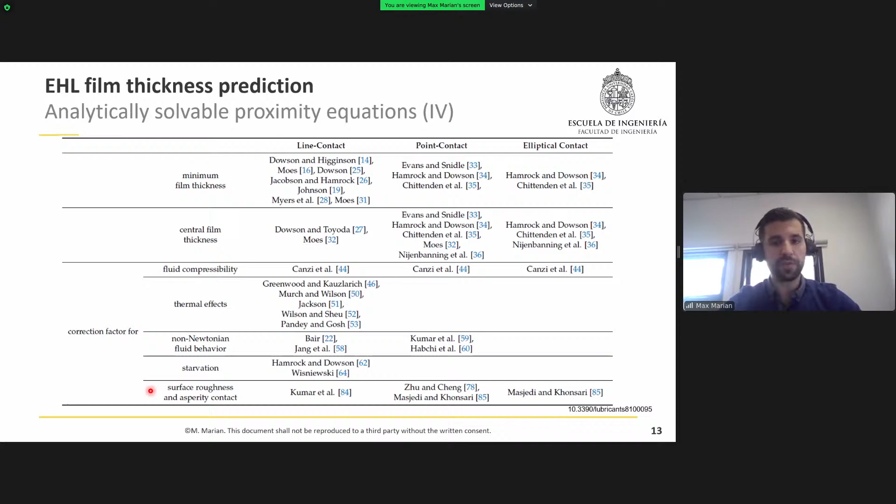What I've previously shown was just a very brief excerpt from all the work done in that direction. We always have to bear in mind that all the film thickness equations and correction factors were originally derived from different numerical data, and therefore they have different individual ranges of validity.

While comparison with experimental data is difficult for infinite 2D line contacts, this possibility exists for point contacts using experimental studies with interferometric film thickness measurement. Quite good agreement has been reported, especially for the central film thickness, even when using lubricants with shear thinning characteristics and when thermal effects are expected.

There's also quite good agreement when we use these equations for the central film thickness outside of the stated ranges. But it's extremely important for the minimum film thickness that we only apply them inside the stated ranges, which were the basis for building these equations, because outside of these domains the equations are greatly influenced and could not predict well.

So two years ago, we published a review article, open access, where you can find much more detail and information on all these aspects.

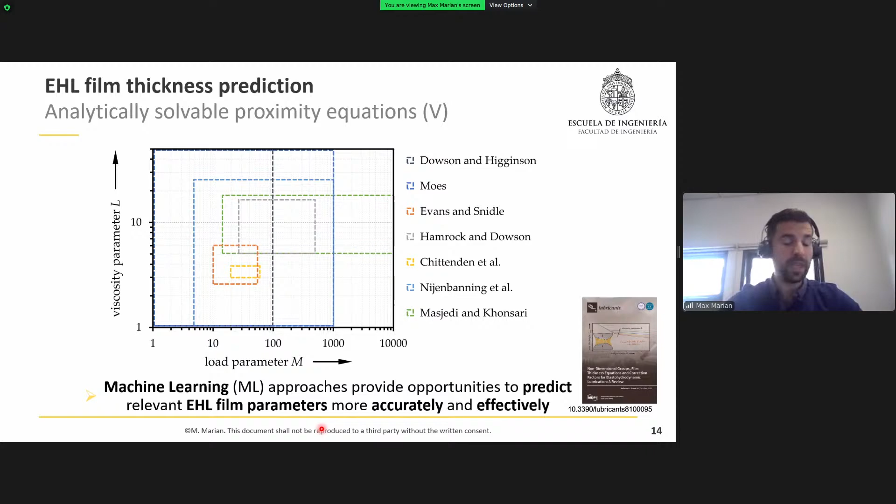In doing the research for that review article, we hypothesized that machine learning approaches could provide an opportunity to predict the relevant EHL film thickness parameters more accurately and effectively, for example in terms of speed and the flexibility of what we can predict.

We have already heard quite a bit about machine learning within this webinar series. Machine learning, or ML, and artificial intelligence are rising stars in many scientific disciplines and industries, and high hopes are being pinned upon them. Essentially, ML is part of AI and originally a subdomain of computer science. AI and ML are formed by logic, probability theory, algorithms theory, and computer science.

In the first step, ML involves designing computing systems for special tasks that can learn from training data over time and develop and refine experience-based models that predict outcomes. The system can be used to answer a question in any given field. There are a number of different algorithms that can be used for ML, whereby the suitability of each approach is strongly task dependent. Generally, we can classify these machine learning algorithms into supervised, unsupervised, and reinforcement learning.

For supervised learning, the algorithm basically learns a relation from any given data set or set of input and output, and during the learning, a teacher or an expert provides the correct input and output. In unsupervised learning, the algorithm generates a statistical model that describes a given data set without the model being evaluated by a teacher.

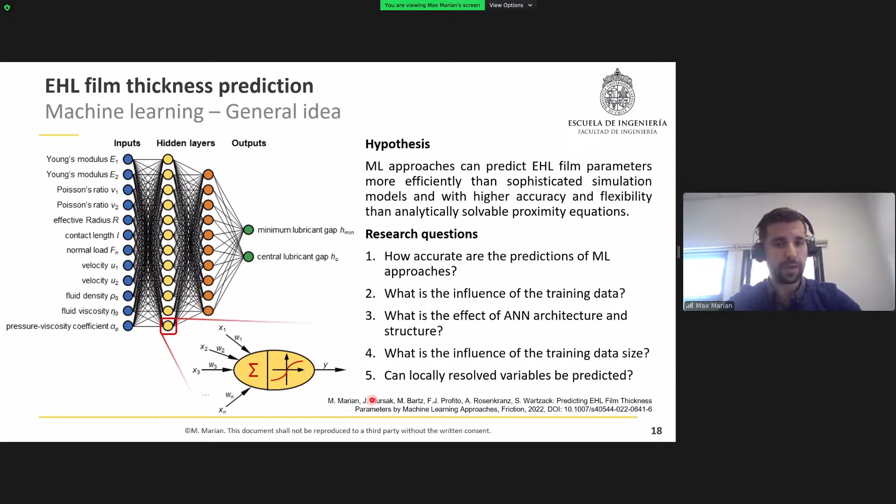And the fifth one: is it possible to determine locally resolved film thickness distribution, like the film thickness as a function of the contact length, instead of only two integral parameters?

So our overall approach is illustrated on this slide. At first, we define the data we need, including the original inputs and the non-dimensional parameters, and subsequently we constructed a design of experiments based upon Latin hypercube sampling, and calculated all the trial points that we sampled by a finite element method-based EHL model, and also used proximity equations to predict the integral film parameters.

Afterwards, we split the data into a training data set and used this training data to build support vector machine, Gaussian process regression, and artificial neural network ML models. We also split the data into test data to evaluate the prediction accuracy of our models, and for that we use the coefficient of determination R squared.

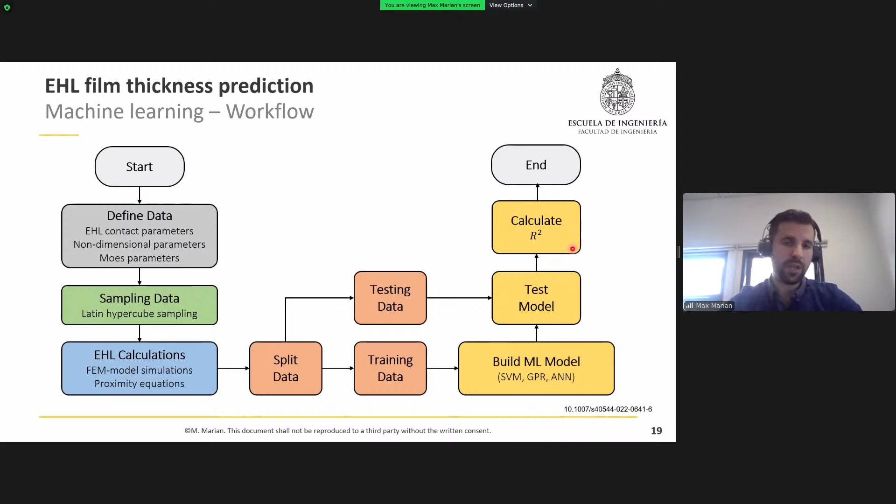We trained all the models first with the original input parameters that we also put into the EHL simulation. We also trained them with the non-dimensional parameters G, U, and W, as well as the Moes parameters M and L, and had a look at what this does to our prediction accuracy.

Subsequently, the EHL problem is computed fully coupled, whereas the Reynolds equation is solved in a weak form on the boundary of the elastic body. The whole model was implemented in COMSOL Multiphysics, which is kind of state of the art now, so there's nothing really special about it.

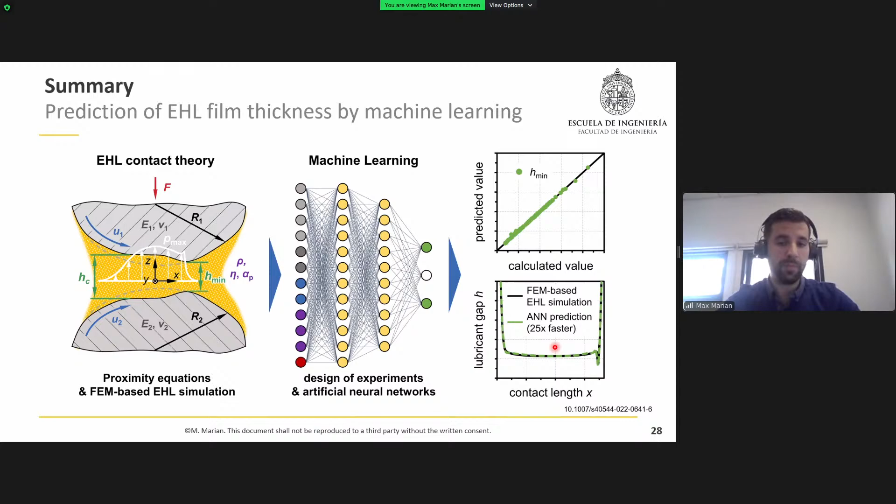So we hypothesize that in the future this might bring really added value for higher level simulations and to actual engineering system design processes. That's all from my side.

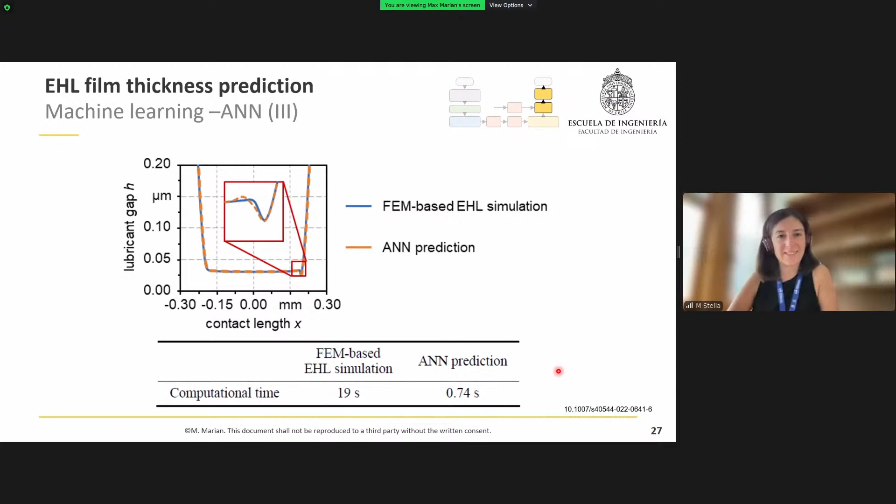Cool, thank you. That did answer the question. Yeah, thanks.

I actually have a question in a similar direction. First of all, so we are using either the proximity equations, as you call them, or we are solving like Habchi, or you are doing the finite element problem, or we are using a multi-grid code to run the simulation and get our contact solution. So just from a practical point of view, if I look at the proximity equations, they can be written into a paper and I can publish them. If I come with my neural network, how would this be made available to everyone? I don't have any experience in the neural network world. Is it just like, can I save the trained brain somewhere and then use it? So you do the training and I just use it as an end user somewhere?

Basically yes. We would be able to provide any kind of pre-trained ANN that you can simply run. So that is possible. Actually, we're currently working with the Tribonet platform to provide it online. We just have to add some more explanations, and also because we had the comments in German, we're converting it now into English, and then we want to make it publicly available.